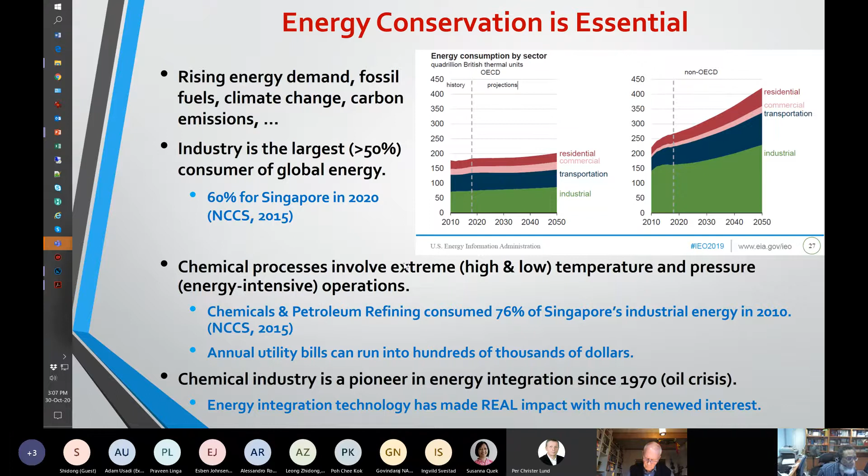So what is my objective? I want to give you an idea of what heat integration means, what heat exchange network synthesis means. I'll give you an introduction to two popular methods used for heat integration problems: pinch analysis, the household word in heat integration, and mathematical programming, the newcomer with a lot of potential. I'll also describe a little bit of work. I promise there's no more than one intimidating slide in my presentation with any mathematical notation.

We have done some work to advance the frontiers, and there are certain novel areas, extensions, for example interplant heat exchange and work exchange, which are important advances in this field.

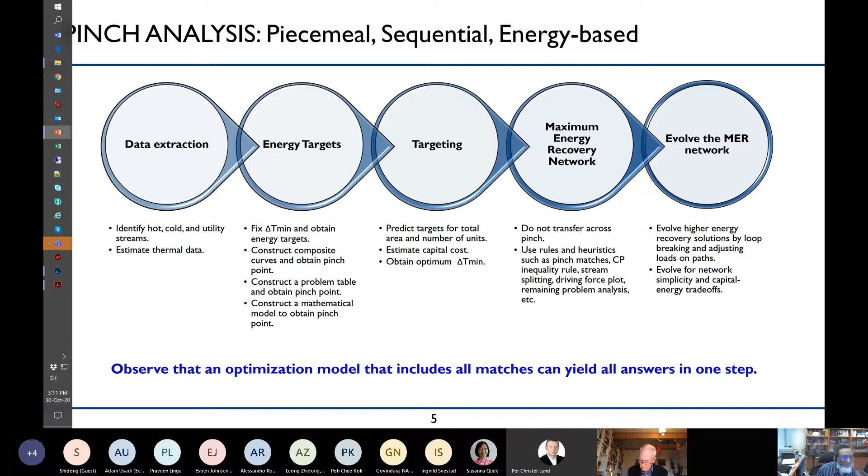I think pretty soon after this started, people realized that if they could express the entire problem as one optimization problem and use an optimization method, they could get all the answers in one shot. That led to the idea of mathematical programming, an integrated method of looking at all the questions and giving all the answers in one shot. One difference between the two methods is that mathematical programming has been more cost based, though it can be used energy based as well, but it was primarily designed for cost based objectives.

And what you do is something called a superstructure, which is you try to include all possible combinations of heat exchanges into a graphic, into a process structure, which you then solve as an optimization problem. So what happens is that things that are not so good get dropped out of your superstructure, and then what you get is a net structure, which is the best structure for your heat integration.

So as I said, superstructure is the key. It defines all the admissible network configurations. If you miss out on a degree of freedom, then you miss out on some particular possible configurations, and then you get inferior solutions.

I think I have lost my stopwatch. Okay, stopwatch is working. All right, fine.

So there are two classical workhorses for superstructure which were developed back in the 80s. But there are some limitations of these superstructures. They miss out on some configurations, and also a key aspect is that they are not readily extendable to address the retrofit problems. And I think you can realize that most plants exist, and lots of them have heat integration opportunities, so the retrofit problem is a very important problem. So we need something which would be able to address both grassroots as well as retrofit problems seamlessly.

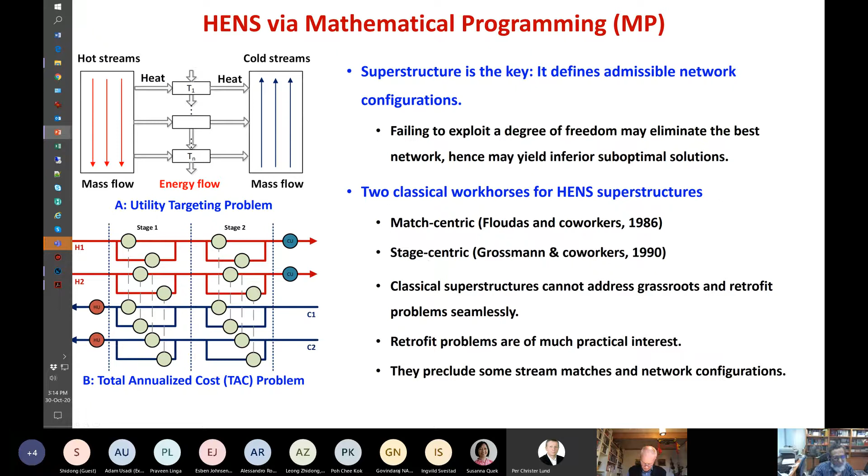I think that was one of the motivations which led us to come up with a novel superstructure, which is basically an exchanger-centric superstructure. The two superstructures that I mentioned, one was match-centric, meaning you try to see what are the possible exchanges, matches between streams. The other is called stage-centric, where it divides the evolution of temperature for every stream into segments or stages, and then tries to look at the possible combinations.

So what we did was, instead of looking at it as a stage or as a match, we look at it as a pool of exchangers. We're saying that a heat exchanger network is really basically a bunch of exchangers, and I have to assign streams to that. So instead of looking at a match or a stage, we look at the exchanger and see what stream should I assign. Obviously I should assign one hot stream and one cold stream, but in a superstructure I say I'm going to assign all the streams and let the optimizer decide which stream is the best combination to assign.

So basically what we come up with is a nonlinear model which selects the exchangers and also assigns the streams to minimize the total cost of the network. So it's a very flexible superstructure. It takes care of the limitations of all the other previous superstructures, and it gives you a solution.

So clearly it's not an easy problem to solve, so we developed an algorithm to solve the problem also, and we showed this on 3 literature case studies. You don't need to go into all the details, but suffice to say that we've been able to get better solutions on all 3 case studies, especially on the first one, which involved a lot of utility usage. We were able to save around 66% of the TAC, the total annualized cost. And we also found a solution which is better than the so-called global solution reported in the literature.

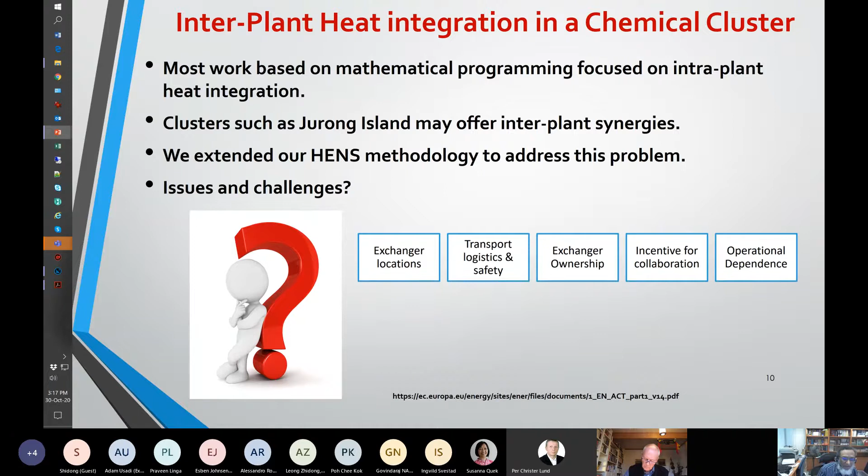How do you ensure operational dependence? Because your operation is now tied with somebody else's operation. Something goes wrong, you get affected as well. So all of these are very pertinent questions.

How do you share expenses? What about the pressure losses in the pipeline? What about heat gains and losses? What about if you want to use a heat exchanger fluid that circulates through the plants? What about the cost of piping, etc.? So there are a number of challenges that are different from the classical heat integration problem that people have addressed.

So we looked at developing formulations and procedures for, if you were to locate all your exchangers at a central facility, and then send streams back and forth to make them heat exchange there. This is something that could be managed by a 3PL or similar.

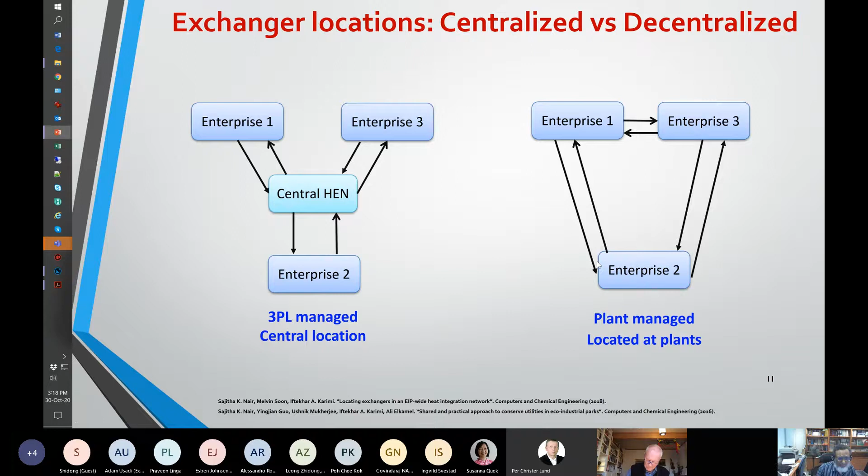Or it could be another possibility where you have enterprises, and you locate stream exchangers at those enterprises, and then send streams from one end. So this is a more flexible way of looking at constructing the network.

Then we also looked at the net present value of all of this. And we thought that maybe the incentive for each participant to take part in this would be to ensure that the rate of return is the same for each stakeholder, proportional to the savings they get, so they also make an investment. So we use NPV as the objective function, accounting for utility expenditures, piping, maintenance, etc., and capex expenses, and then we come up with a...

What happened? Recording, something went wrong. Your presentation ended, someone else has started sharing. Oops, no, I don't think... Well, we don't see that. Oh, just you don't see it? Is it? No, so please start sharing again. Okay, start sharing again. All right, sorry. Start sharing again.

Okay, so basically we did a case study. It's a simple case study, right? Obviously, but the methodology is general, one could look at a very real case study as well, which we are trying to identify. So if you have 3 plants and several streams at each plant, we found out that you can compare distributed versus centralized HEN.

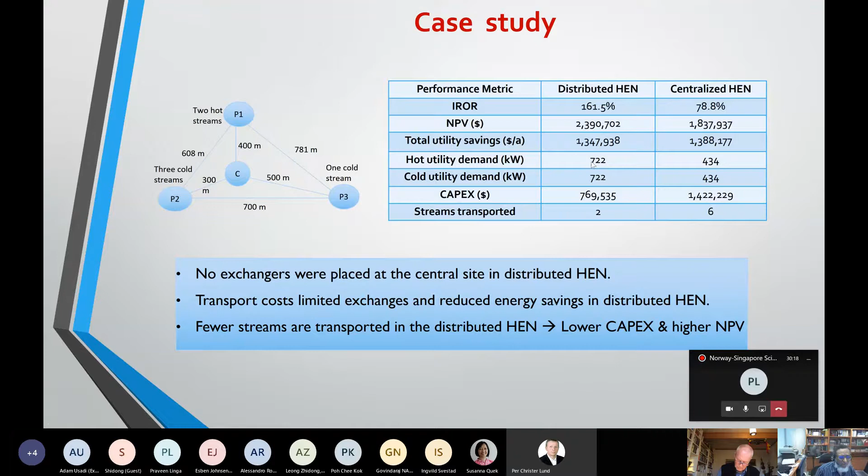So what happened was that the utility savings you get in the distributed system is less than the centralized system, but the cost of transport, etc., outweighs the cost of utilities. So the distributed heat exchanger network system comes out to be better from an overall cost perspective. That methodology can be used in practice as well.

So the second extension I talked about is the extension of heat exchange to work exchange. We all know, right, work costs more than heat. Heating is cheaper than pressurizing. So, electricity... how can we address this?

This is an idea that was explored maybe 10-15 years ago at University of Michigan, where they tried to say, okay, if I have a high pressure stream and I want to depressurize it, I can run a turbine, just like you use high pressure steam to run a turbine and get energy to run a compressor.

So the same idea, instead of using steam and a compressor, what if I use a high pressure stream and a low pressure stream? I transfer energy from the high pressure stream to the low pressure stream. So there are obvious analogies between heat exchange and work exchange. In heat exchange you deal with temperature changes, in work exchange you deal with pressure changes. And you can also draw corresponding analogies between streams and utilities, etc.

So the idea is, one other way of transferring work is having a common shaft. This is used in the industry, in the LNG industry for example. This is called a turbo expander, turbo compressor, and you can transfer the energy from the turbine to the compressor.

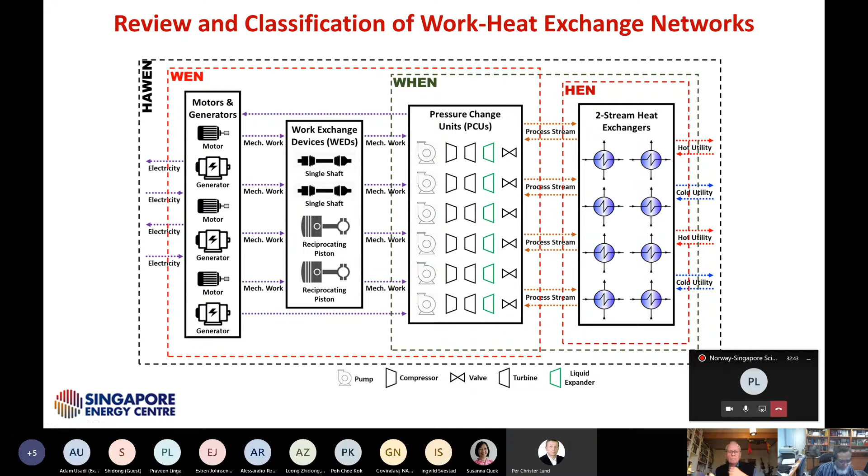Then a few years later, we looked at the use of a single shaft to transfer work. So there we are talking about actual work exchange in a literal sense. And if you put all of that together, what you get is a heat and work exchange network. This classification provides us a good framework within which we can develop our solutions.

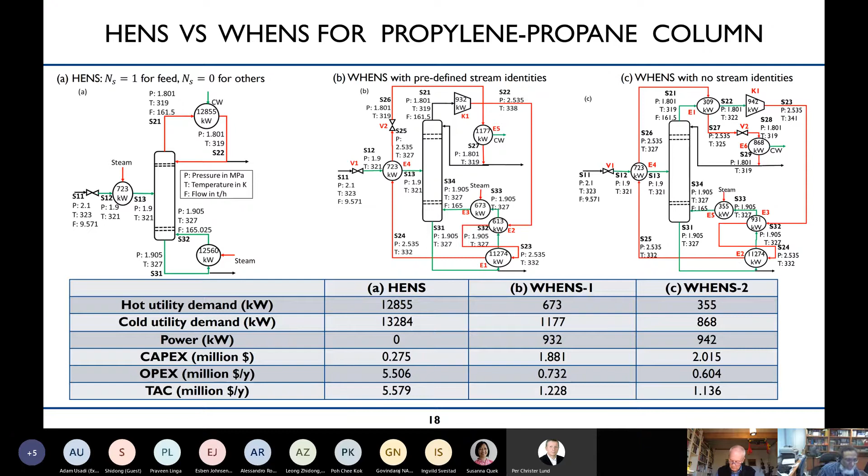So this is again intra-process, but we can extend this to inter-plant as well. All right, okay, so to conclude.

I think work heat integration is now a growing field. A lot of people are interested, and Prof. Gundersen has published a number of review papers on this. We believe that this can offer really very good novel solutions, because I wanted to always have a procedure which will derive the refrigeration cycle or the best cooling cycle, and I can do that automatically using the methodology we have developed.

Okay, so thank you very much for your attention.

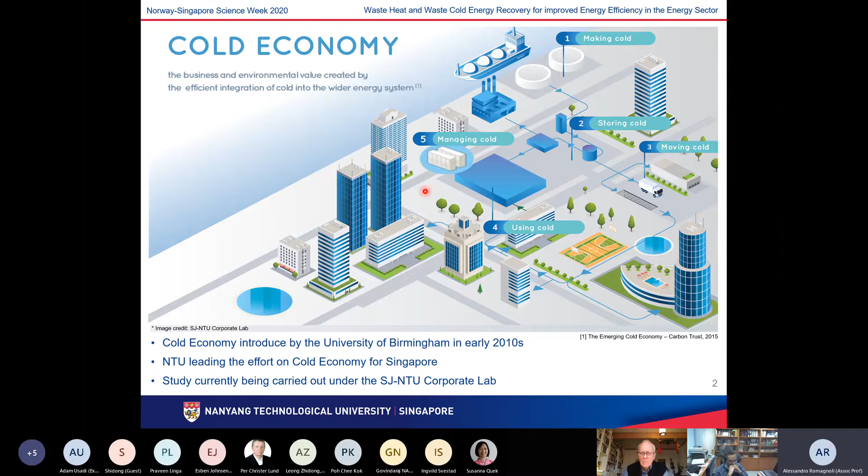So why a cold economy study for Singapore? The cooling degree is expected to increase by 12% by 2040, and there are industries growing in scale that require a lot of power and cooling, for instance data centers. Singapore isn't a mega city by definition, but the population is meant to grow with higher cooling demand. Also, Singapore being a developed economy might represent an example for neighboring countries or cities that eventually develop at a similar stage over the next few years.

One aspect everybody knows about is the availability of LNG, and therefore the opportunity to recover some of this LNG cold energy coming from the regasification of liquefied natural gas.

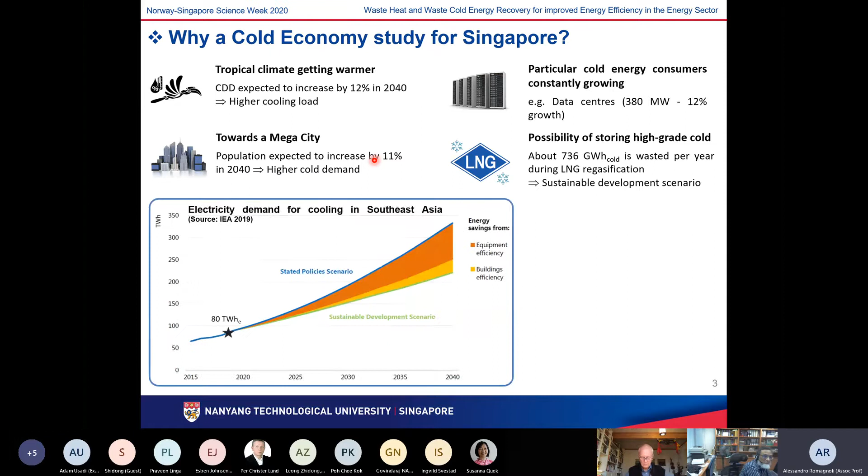If we look at the demand for cooling in Southeast Asia, this is basically for space cooling. You can see this trend as reported by the International Energy Agency. This is where we are now.

In a similar fashion, we are trying to estimate the cooling and refrigeration demand for Singapore to create a baseline, develop forecasts, and eventually study scenarios on how best we can meet this demand. The reason we are doing that is because we couldn't find any publicly available resource that breaks down the cooling and refrigeration demand for Singapore.

So we started with data collection across main sectors: households, industry, commerce and services, and transport, and for some of these we also look at subsectors. For each one we try to estimate the cooling and refrigeration demand. The approach we follow is top-down, and we had to go through a lot of documented resources from official records and published studies, validating the information and calculations we came across.

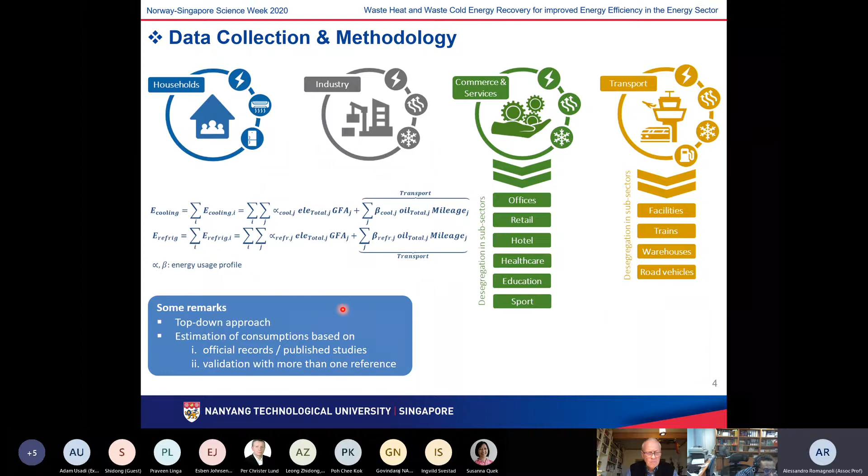And this is basically what we could find out. This is the first time we are presenting this data, so the numbers are evolving, and we are more than open and welcome anyone who might want to collaborate with us on this exercise.

Over the past 10 years there's been a constant increase in cooling and refrigeration demand, about 30% increase, and roughly 25% of electricity consumption in Singapore goes to cooling and refrigeration. This accounts for roughly 7% of the total electricity demand in Southeast Asia for cooling. This number about fuel is mainly related to road transport, trying to estimate how much of this fuel goes into cooling of vehicles.

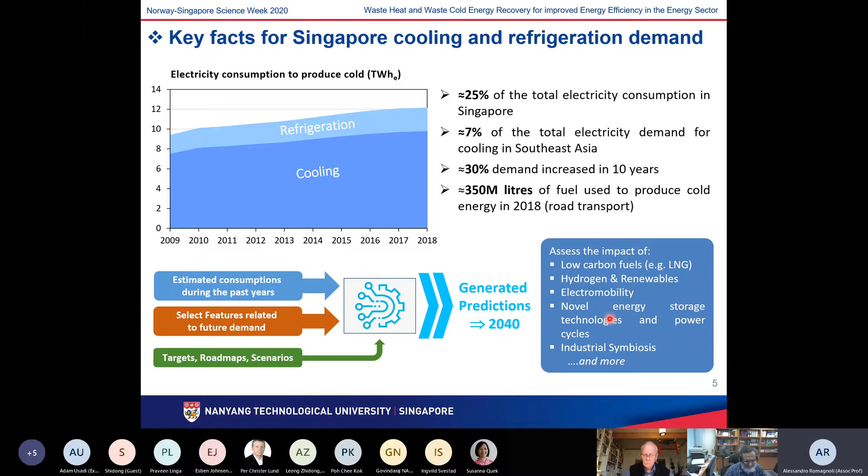So now we've done the estimate. As I said earlier, we want to project across all the different subsectors and eventually study how best we can meet this cooling and refrigeration demand, looking at opportunities or scenarios offered by low carbon fuels, renewables. Now hydrogen is also in the picture. Electromobility might be another driver, and also novel technology for power generation or storage.

So when we look at LNG, more or less 2% of the overall energy content in natural gas comes from the cold energy.

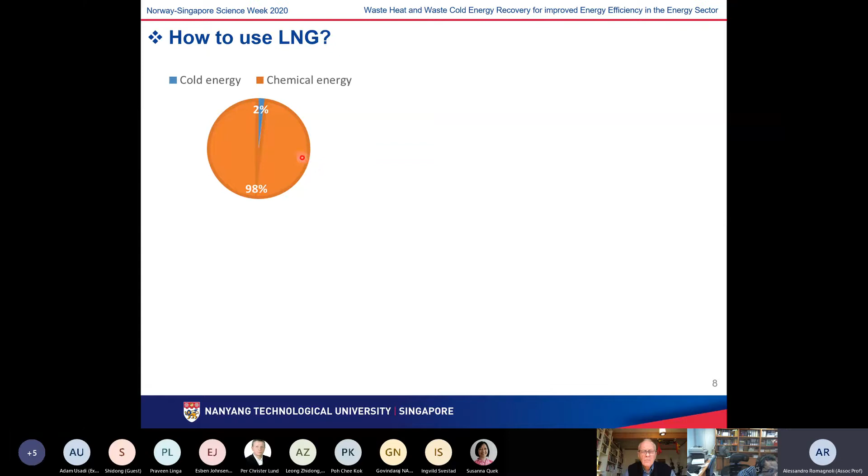The remainder is chemical energy. If you want to position some of the technology that entirely makes use of chemical energy, or for power generation, or that make use of the cold energy for cold generation.

When we look at technologies devoted to producing or making use of cold energy, these are some industries and applications that can leverage on LNG cold. Then there are some in between, like CCGT, which makes use of LNG cold to pre-cool the air at the inlet of gas turbines, and ORC, organic Rankine cycle, which leverages heat coming from a combustion process and can use the cold energy as a heat sink.

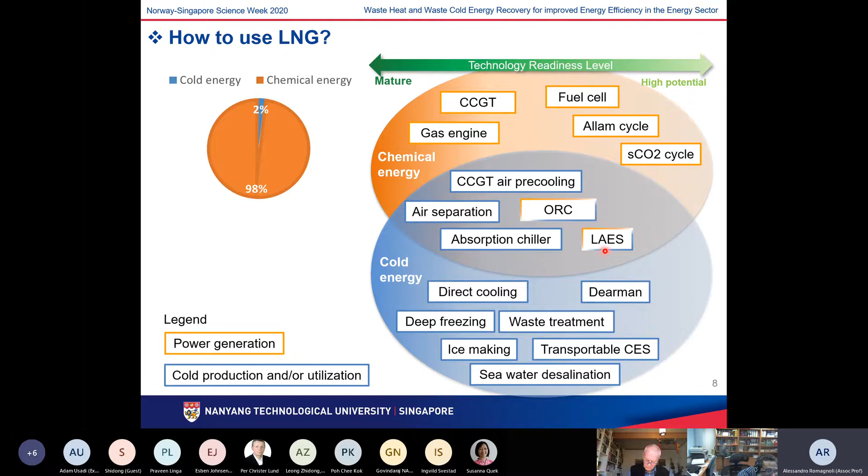The same goes for liquid air energy storage, which is a new form of thermomechanical storage I'll describe later on. So, where we start from is typically the regasification process with gas going into CCGT.

There is some waste heat that can be recovered to generate chilled water, for instance, or electricity through closed power cycles. Some of the LNG cold regasification could be used for air pre-cooling, or as a heat sink, or for direct utilization to the end user.

So we took a baseline looking at CCGT with no waste cold energy recovery and no waste heat recovery. We took that as our baseline, then started looking at different levels of integration for heat and cold energy recovery, such as CCGT plus organic Rankine cycle, or CCGT with inlet air pre-cooling using LNG cold.

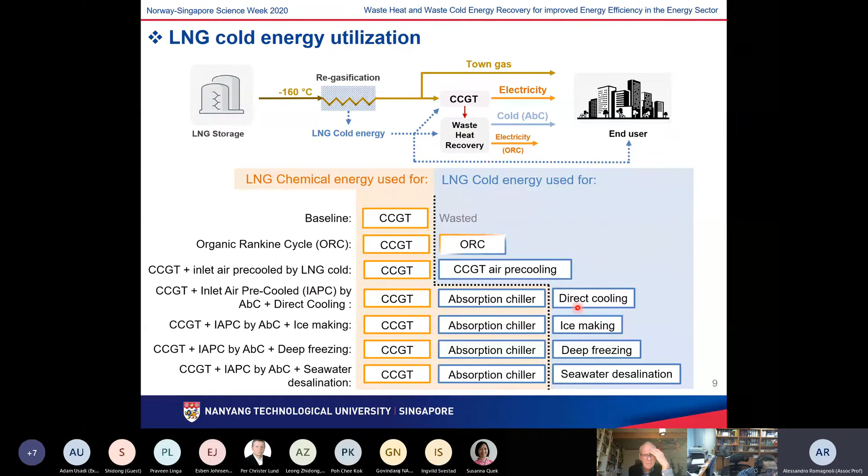Probably the best option would be to couple the CCGT with an absorption chiller, using some of the chilled water from the absorption chiller to pre-cool the inlet air of the gas turbine, and then use the LNG cold for some of these sector applications.

It's still something meaningful, but most of the profit comes from the absorption chiller and chilled water generation. When we go to different applications, the lower we go in temperature, like deep freezing, the better energy savings can be achieved for that process.

We also see that the ice making industry could leverage quite a bit on LNG cold, because ice is actually sold at a very high price. As for CO2 emissions reduction, significant contribution could come from the absorption chiller, which could allow emissions reduction by more than 30%.

Then there are some other scenarios we wanted to assess. For instance, we looked at the Allam cycle, which has been demonstrated in the US by a company called Net Power. This is a supercritical CO2 cycle which starts with an air separation plant.

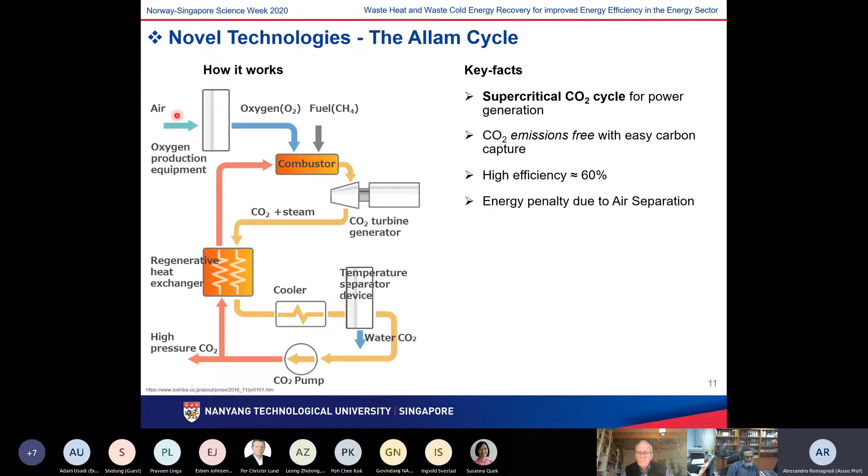It comes with a large energy penalty due to the air separation, because cryogenic air separation takes quite a bit of energy. That is where we could leverage LNG cold to bring down the energy penalty due to air separation, and this could provide an additional 10% in terms of efficiency.

As we separate oxygen from nitrogen, some of this nitrogen, if liquefied, could be used for this new form of storage, which we call liquid air energy storage. So nitrogen as a byproduct could be liquefied and used for liquid air energy storage. So what is this liquid air energy storage?

Liquid air energy storage is a process that liquefies and evaporates liquid air to store and regenerate electricity. So how does it work? Of course you need power input, and basically we take ambient air, clean it, compress it, refrigerate it, and liquefy it at minus 196 degrees Celsius in an unpressurized vessel.

This liquefaction process corresponds with the charging phase of this energy storage concept. Then, when we need to discharge it, we can pump this liquid air at high pressure, regasify the air, and expand the gaseous air in a power turbine. The exhaust will be gaseous air, and power will be generated.

During the compression and liquefaction process, there is heat being generated that can be stored and reused during the discharge phase. And during the regasification process of the liquid air, there is cold which is released, that can be stored and reused internally for the liquefaction process.

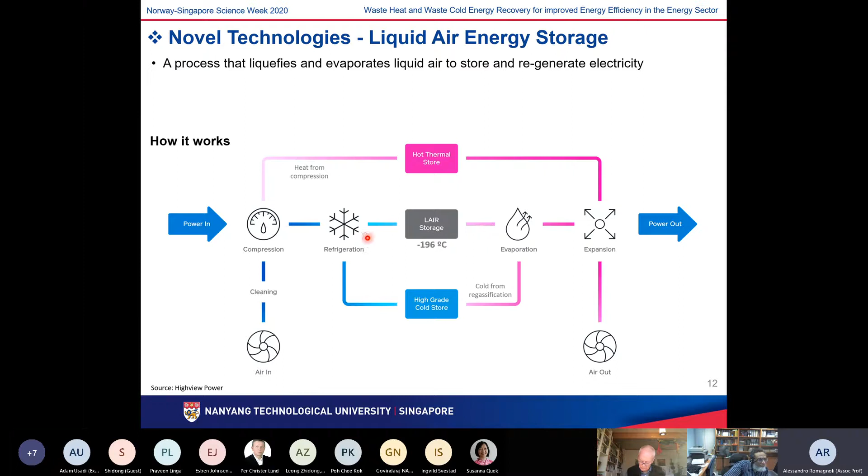So in this form, with this layout, the claimed round trip efficiency is around 50%. Again, numbers vary. But if you could leverage LNG cold as well as an external waste heat stream, then potentially you could achieve a round trip efficiency of more than 80%.

This concept is of interest because we can also consider a cogeneration operation for this facility, in which we generate power as well as cooling during the discharge phase of the liquid air during the regasification process. Another option, if you have natural gas, is using high temperature fuel cells, which have very high temperature heat streams that could be used to drive a supercritical CO2 cycle.

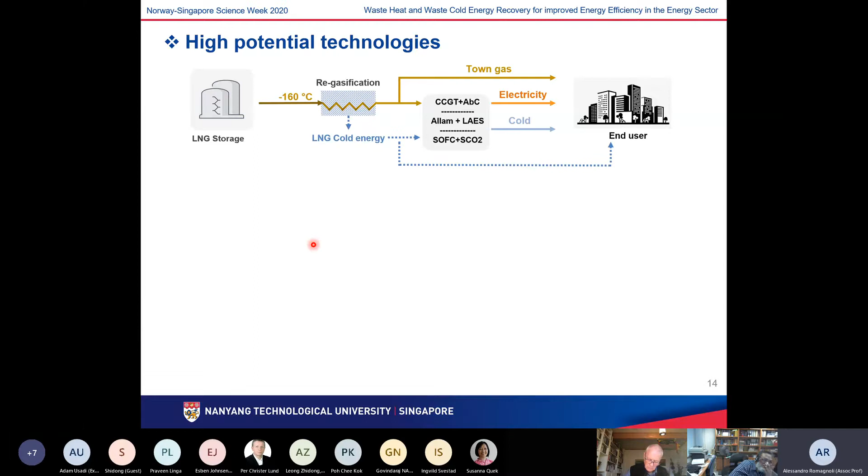So these are some of the integrations that could be considered that we put into our study, to see what the impact could be in terms of improvement in efficiency, as well as contribution in terms of CO2 emissions reduction. So here are some of the different integrations that we consider.

Baseline is the CCGT with no waste heat or waste cold being recovered. Then we took this configuration with the CCGT plus absorption chiller, with air pre-cooling before the CCGT and utilization of the cold for direct cooling. We could have chosen some other application here as well.

Then we look at the integration of an Allam cycle plus liquid air energy storage, because as I said earlier, we can make use of the cold energy from regasification to assist the separation process of nitrogen and oxygen, as well as support the liquefaction of nitrogen, which could work as a substitute for air in the liquid air energy storage concept, serving as a storage system. And then a solid oxide fuel cell combined with supercritical CO2 cycle, using LNG cold for instance for direct cooling.

So again, if you look at the overall profit and the CO2 emissions reduction, you can see that as we go for different levels of integration, moving from this side to this side, the CO2 emissions reduction improves as a consequence of the higher efficiency that can be achieved. But of course, one thing to consider is that as we move in this direction, the TRL also decreases.

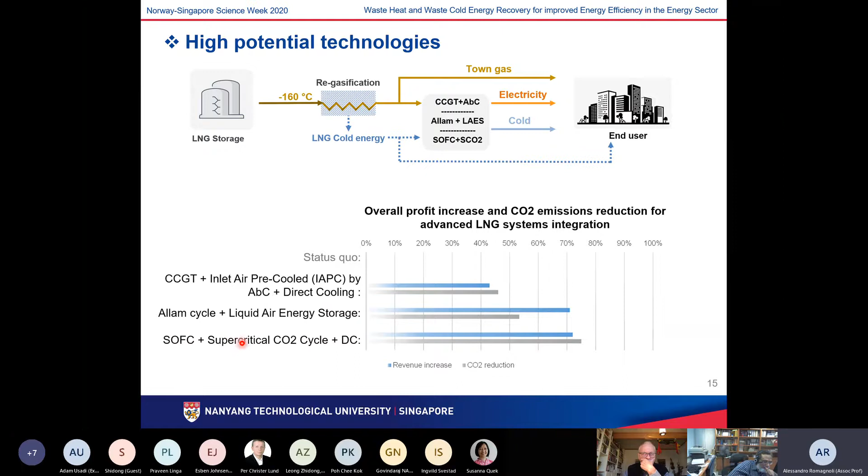So liquid air has actually been demonstrated. This is fairly high TRL, but still not widely or large scale deployed. And for some of these, it's still just in the papers that I can find in some of these studies.

So now, for what concerns the R&D activities here, I put an NTU example, but these are some ideas on R&D activities that could be envisaged in the cold energy space. We see that there is a bit of a lack of research activity when it comes to thermal energy storage at the sub-zero temperature range.

The number of materials available and papers and publications is improving due to the fact of having more and more LNG in the picture, and also maybe cryogenic hydrogen being considered as a form of storage for hydrogen. But we see that there is not as much activity as on the hot part.

Also what we see is that we still need quite a bit of work when it comes to system design, optimization and integration. So if you want to combine some material for thermal storage together with heat exchangers, how to couple this together and optimize the design to meet a certain demand - it really depends on what is the KPI for this. It is still not a fixed methodology, and I think there is some work that could be done in this space.

So the way we started it, we began to map which are the materials, the studies on experimental and numerical work, and some of the applications, trying to also capture some of the TRL for some of the works being done in each of these areas as we move lower in temperature.

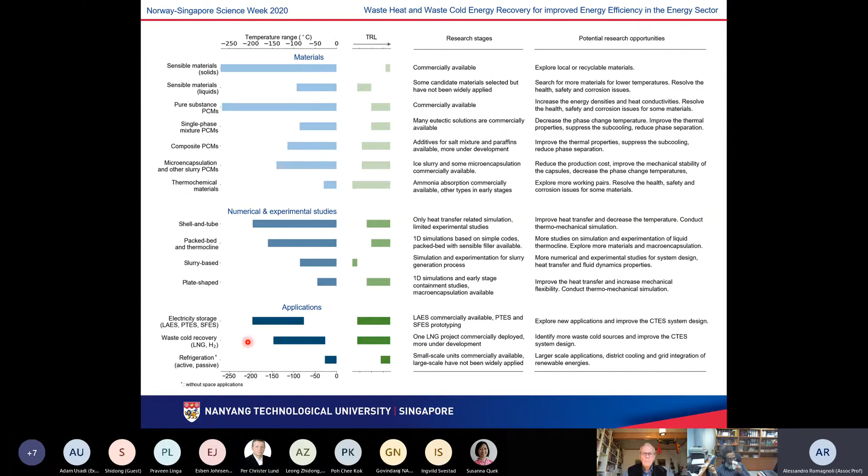Not to go through each one of these, but basically there is still quite a bit of gaps, as you can see, in this temperature range, and also the TRL seems to be pretty wide. But as I said earlier, there is not much work being done in each space, so there is an opportunity there to improve.

And then for what it concerns the studies for system design and optimization, we currently have set up this facility, which is basically, we call it a...

So did we lose Alessandro now? Yeah, cannot hear it. Right. Okay, so maybe he's coming back, but he was coming back.

And while we are waiting for Alessandro to come back online, maybe - because we're moving quickly into the Q&A session for this session - there is a question to you, Professor Karimi, from Esben Johnsen.

He says: in your presentation you have calculated in your net present value calculation, you identified, you simulated or identified the distance where net present value is no longer positive. So his question is, what about the distance? Is that a major driver?

Yeah, so just to answer that question briefly: yes, definitely distance is a very major factor, because often the piping cost and the cost of transport, of pumping, etc., outweighs your utility costs. So it depends - of course the answer is not straightforward, right? There is no generic answer for any system, but the answer to your question will depend on specific details of the system, because what you're talking about is distances of inter-node distances, and there are many of them. So I cannot really take one distance and say, okay, if I elongate it further, what will happen? But the short, brief answer is yes, it's a very major driver, and it can negate your solution. So beyond a certain distance, you may not be able to achieve what you want to do, because the capital costs associated with the piping could outweigh your operating costs. I hope that answers the question.

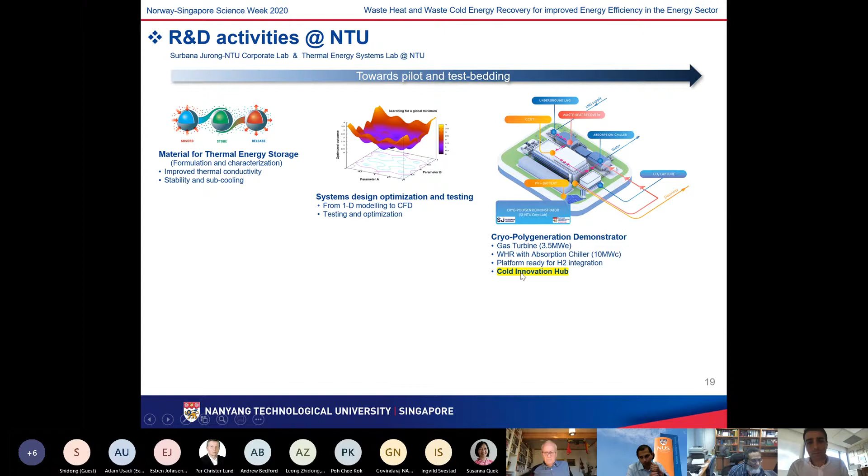And also we are going to test ways to store LNG underground, and we are going to set up again a sort of living platform for what we call a cold innovation hub, where companies or researchers that may want to test and demonstrate technology leveraging LNG cold can come and use it. So this is open across the research community and also to industry.

So for what it concerns some of the work that we are doing, we are working on cold thermal energy storage system design, also looking at ways to store cryogenic energy, moving away from membrane technologies.

So basically, in conclusion, these are very qualitative findings, but what I can say is that there is still a bit of a question mark, and we need to achieve a bit more understanding of some of the demand for cooling and refrigeration in Singapore. Knowing what happens in Singapore is not just useful for Singapore, because as I said earlier, it might also serve as a pilot for neighboring countries.

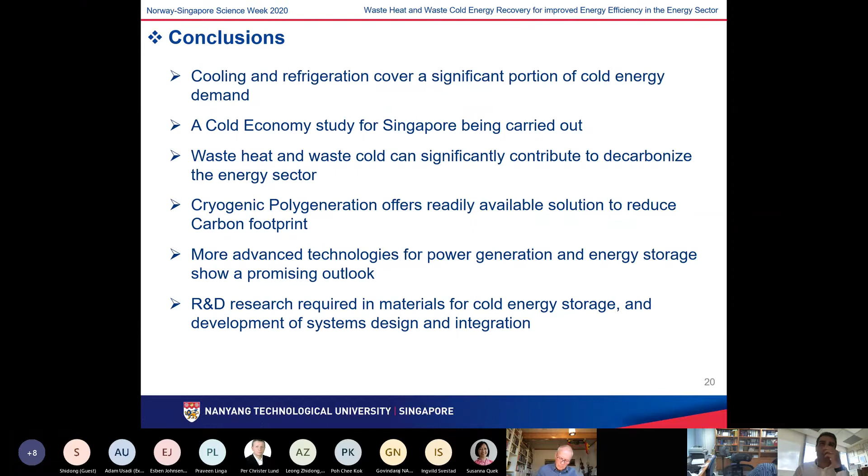When it comes to waste heat and waste cold, this can offer quite a bit of an opportunity to quickly reduce CO2 emissions. Some of these options are readily available when we look at the polygeneration system that basically would help, but of course that would mean we have to distribute energy generation island-wide. We also look at different power cycles and thermal energy storage systems that seem promising. In terms of R&D, we think there is still some work to be done in the cold and cryogenic energy space, in terms of materials and energy systems design and integration.

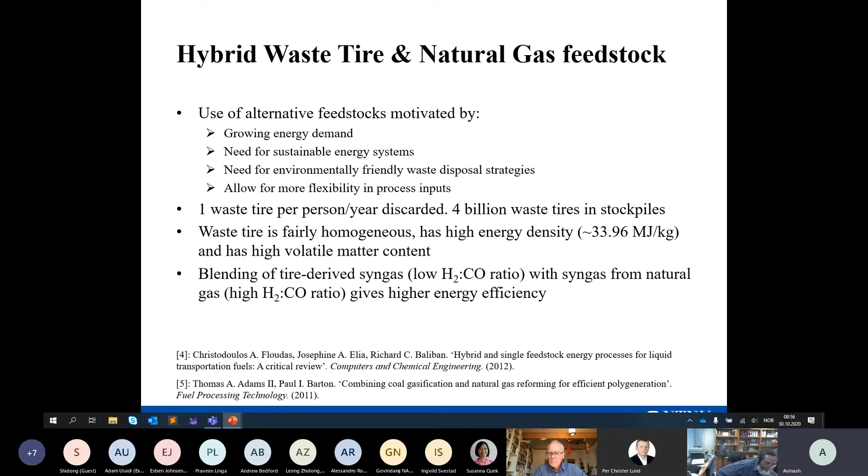Lastly, if we were to combine waste tire and natural gas, the syngas ratios work out. As mentioned, waste tire gives us hydrogen-lean syngas, natural gas gives us hydrogen-rich syngas, and we can blend to get the correct ratio for methanol. So we eliminate the expensive water gas shift and syngas upgrading/downgrading steps.

This slide presents a superstructure of the polygeneration system we studied. We have waste tire, which is mixed with water and oxygen from an ASU, goes through a gasifier and is cleaned up, and then we get syngas. We also implement a water gas shift just to test things. Then with the natural gas, we use the autothermal reforming approach, and we get hydrogen-rich syngas, which you can blend.

We consider three products: synthetic natural gas, methanol, and further on DME and methanol-to-olefins, or direct production of electricity through a gas turbine. We go further to produce liquefied synthetic natural gas.

This optimal flexible design problem can be formulated as what's termed a scenario-based two-stage stochastic non-convex MINLP. Here Y, as mentioned previously, are the here-and-now first stage variables for equipment capacity. The objective is a function of these first stage variables and the second stage operational decision variables, where H indexes the scenario of uncertainty that is realized. We also have constraints on the first and second stage variables.

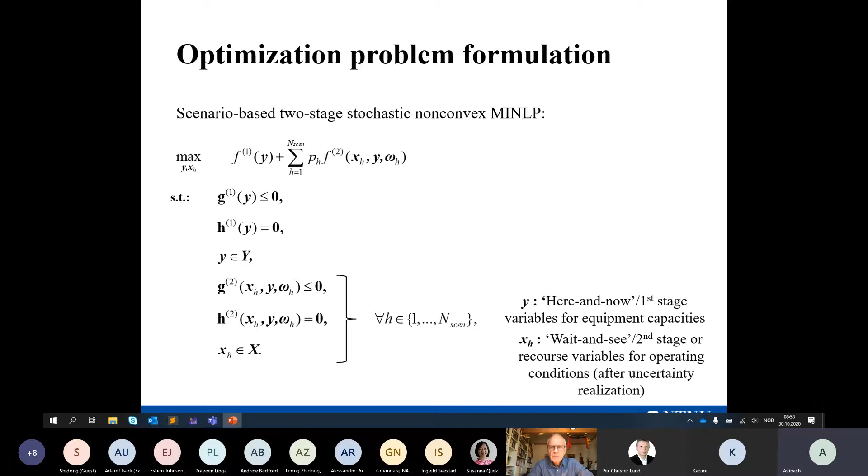So more precisely, for the flexible poly generation system, the objective is to maximize the expected net present value. We have the capital costs, which are a function of the first equipment capacities, Y, and we have the annual operating profits for each scenario, which are a function of the operating decision variables X, H.

The first stage constraints are the capital cost model. Second stage constraints are the mass and energy balance, operating cost, annual net profit model, and scale constraints. We also have complicating linking constraints which make things more difficult between the first stage and second stage variables, so throughput should be less than equipment capacity.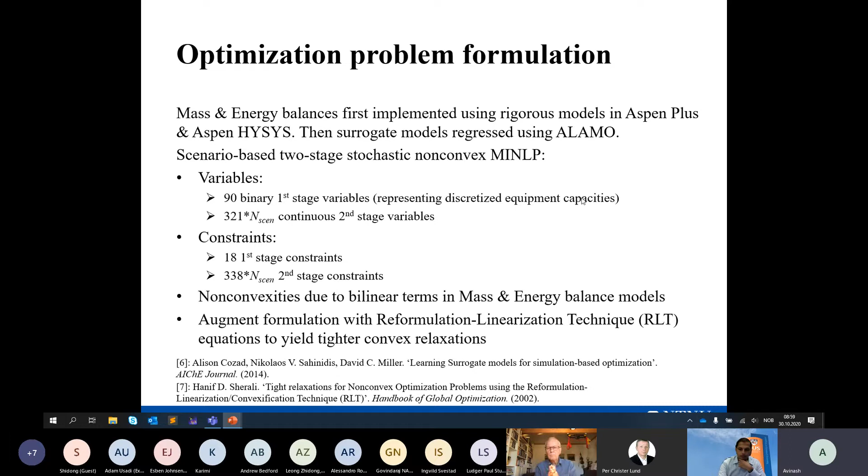This slide presents implementation details, which I won't spend much time on. We basically implement mass and energy balances in Aspen, generate surrogate models with Alamo, and formulate the non-convex MINLP.

This slide presents the uncertain parameters, which are the product prices of natural gas, electricity, methanol, DME, ethylene, and so on. We assumed the prices belong to a normal distribution, and we got mean and standard deviation values from historical prices, as presented in this table.

We formulate the optimization problem using a recently developed software called Gossip, developed in 2018 at Paul Barton's lab at MIT. I won't present details here, but I'll say Gossip provides a versatile C++ framework for modeling these two-stage stochastic programs, and we have an efficient decomposition algorithm to solve for a large number of scenarios, making solving such problems easy and efficient.

Next we present the results of the optimal flexible design problem. We had two case studies. Case study 1 had two scenarios of each of the 5 uncertain parameters, so 32 scenarios in total. Case study 2 had 3 scenarios of electricity and natural gas and 2 for the rest, so 72 scenarios in total. We also compared with the deterministic case where all uncertain parameters take on their mean value, termed the mean value problem, which is just one scenario.

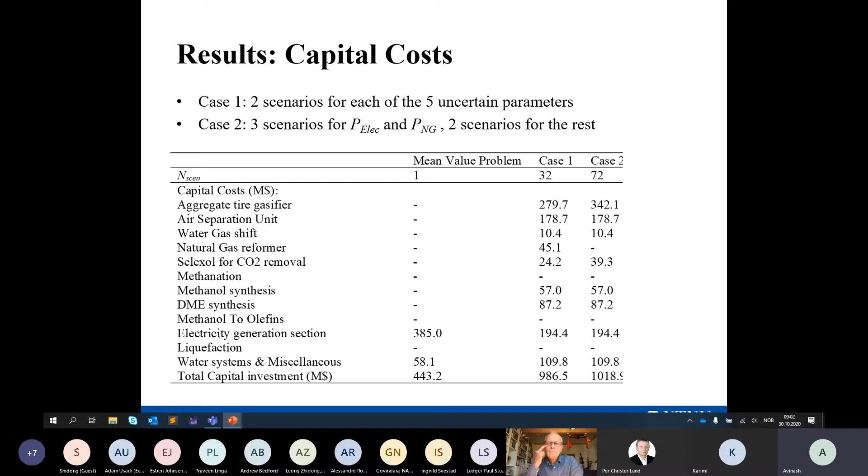Moving on to the operational modes and economic performance: for the mean value problem, we found a case in which natural gas is converted to electricity, fairly basic. But this is only true if all prices remain exactly at the mean value, which is not feasible.

If we take uncertainty into account, we see that the operating mode shifts to favor multiple other products at their price peak. For instance, if DME and electricity experience higher prices, we shift operating conditions to produce that, and we produce methanol when methanol prices are high, electricity when electricity prices are high, accounting for day-night variation and so on.

The main result of this work is that we get a substantial increase in NPV if we take this uncertainty and variation in prices into account and build a flexible design. The expected increase in NPV is in the range of 35 to 55%, so $884 million versus $560 million. This is for a 900 megawatt plant.

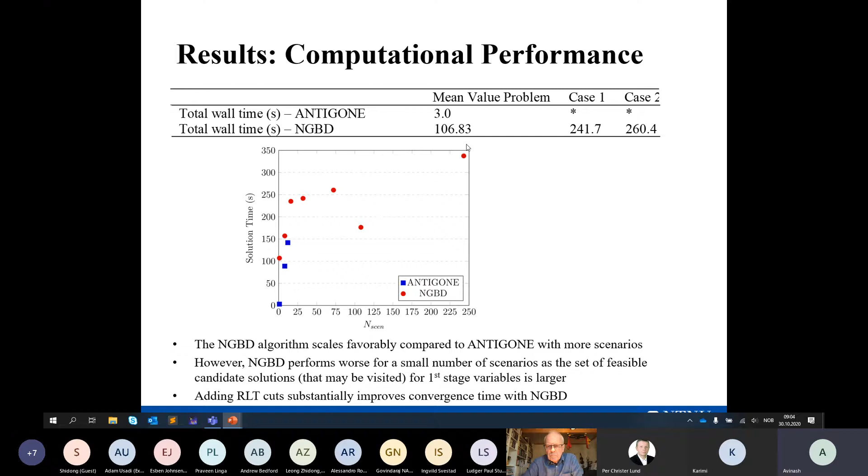Yet using a decomposition algorithm gives us favorable scaling up to many scenarios.

In conclusion, we see that implementing a poly generation system gives improved energy efficiency, partly because, as I mentioned, for these two reasons: we get heat integration of the ATR, which is the autothermal reformer and is endothermic, and the tire gasifier, which is exothermic, and blending of hydrogen-rich and hydrogen-lean syngas streams.

But the major result of this work is that implementing a flexible design gives a substantial increase in expected net present value. We also show that using the decomposition algorithms that were built allows us to take uncertainty into consideration with more scenarios. So thanks a lot.

I'm sorry, I was muting. Thank you very much, Avinash. We will wait with the questions until the second speaker, Professor Chua, Ernest Chua from NUS, is giving his presentation, and then we take the questions for both of you after that.

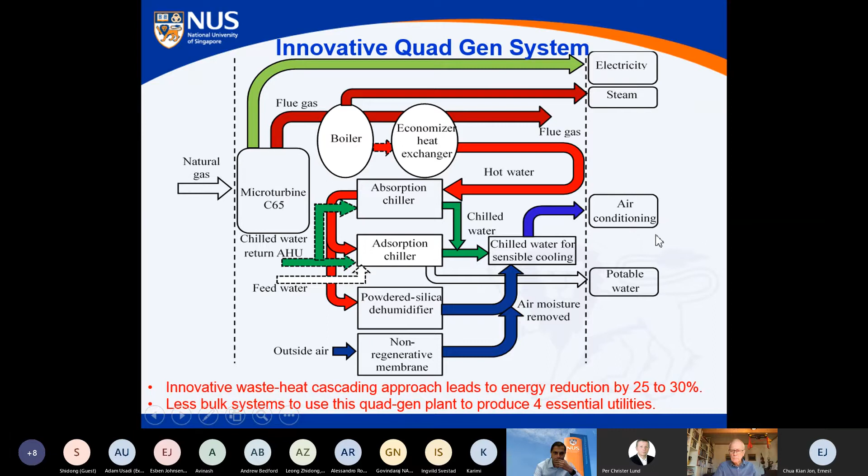And you can also produce potable drinking water. So this is a schematic, and this is the real plant that we have developed in the lab. You can see the micro turbine—it's about 65 kilowatts per unit in the lab. We have 2 units of this, giving us about 130 kilowatts of electricity.

And the boiler is here, producing hot water or steam. The reject heat from the boiler will go through the 2-stage absorption chiller, and the reject heat will also go to the AD chiller. This is a 4-bed AD chiller where we can produce additional chilled water, and at the same time clean up brackish water, desalinating it to produce potable drinking water.

The additional heat coming out from the AD chiller is about 40 to 45 or 50 degrees. We can use it to regenerate the super absorbent, the desiccant, to dry the air. Alternatively, we also have a second stage membrane dehumidifier to further dry the air, for special applications in certain industries that need the air to be particularly dry. Normally in air conditioning, we need the air to be about 12 to 13 grams of moisture.

For certain industries like wafer fab, they need the air to be about 4 to 5 grams. So using this combination of the absorption chiller and the membrane, we can get about 4 to 5 grams of moisture to produce dry air. Additionally, recently we have coupled to this system a dew point evaporator cooler. This is one of our key inventions where we can produce air conditioning, where this evaporator cooler does the sensible cooling. So you get cold and dry air simultaneously, combining with this entire system.

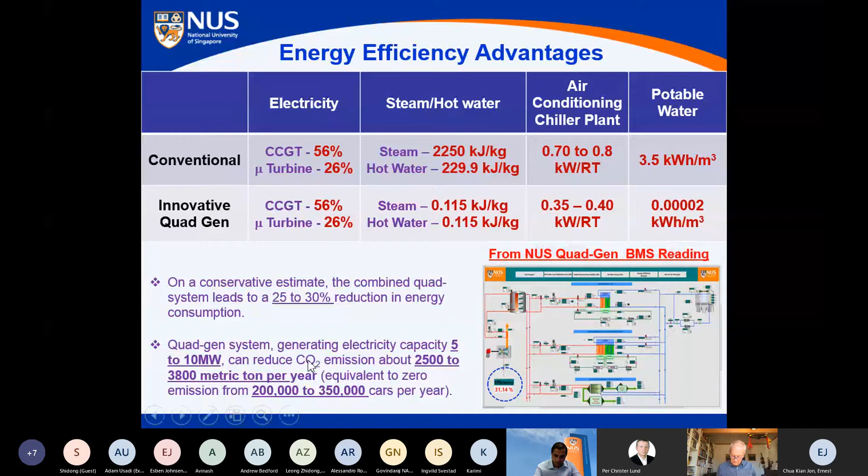So if you look at this, the overall utility production using this innovative quad gen system versus the conventional way, meaning each of these utilities is produced individually, you are looking at about 25 to 30% energy reduction guaranteed. And if you size up the system to about 10 megawatts, we are looking at CO2 reduction about 2,500 to 3,800 metric tons per year. This is equivalent to about 200,000 to 350,000 cars per year. That means removing this number of cars from the road is the equivalent amount of CO2 that you shave using this system versus the conventional system.

So the innovation in this combined plant we have developed is, you can see it's like a Lego system, right? We have innovative systems that are being pieced together to form this entire quad gen system.

So one of the key technologies we developed is the membrane system to remove moisture from the air. This membrane can remove up to 5,000 cmh of air, and with that airflow you are looking at about 2 kg of moisture being removed from the air per hour.

And then we have the super absorbent that we can coat on any metallic solid surface to make a heat exchanger become a latent system as well. Besides removing heat, the exchanger also removes moisture at the same time.

And the beauty of this new material that we discovered is that it only regenerates at about 40 to 45 degrees. If you use silica gel or zeolite commercial material, you are looking at regeneration at about 80 to 120 degrees C. That kind of high temperature regeneration doesn't make sense - you need something with much lower heat to regenerate.

So the two-stage absorption chiller is also designed in-house. We have a two-stage system where we use a new kind of hybrid coolant refrigerant, which is ionic liquid and water. Conventional absorption chillers use lithium bromide and water, which has a lot of problems - it crystallizes in humid climates, and once it crystallizes your absorption chiller has a lot of problems. So this combination of the new kind of coolant refrigerant helps minimize - I should say the chances of crystallization are practically very, very minimal compared to lithium bromide and water.

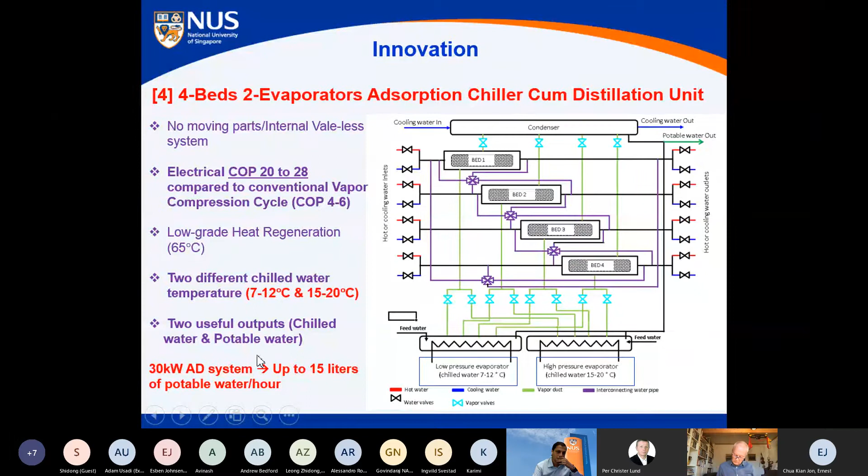This system we designed in the lab is about 30 kilowatt capacity. This is the pictorial version of the system - you can see there are 4 beds, with 2 evaporators producing 2 different chilled water temperatures. And as it produces chilled water, clean water is being produced at the same time.

Three minutes more, please. Yeah.

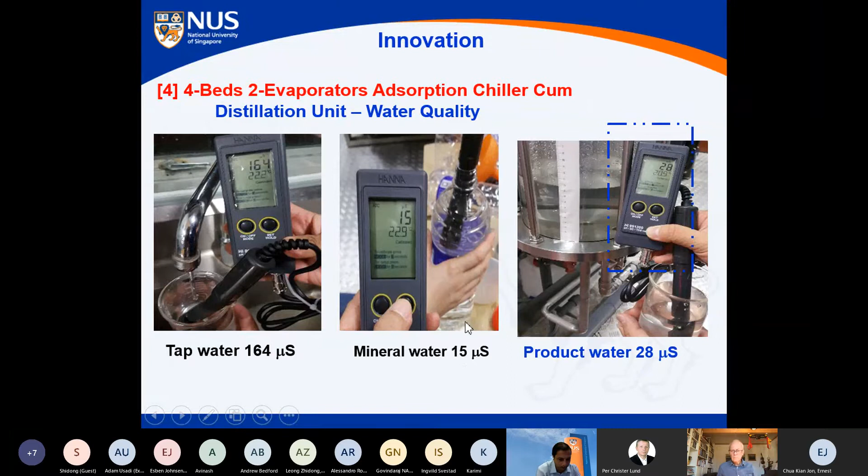And then you ask how good is the clean water. The water is very good. If you look at the product water, it's about 28 microsiemens compared to your mineral water. So I'll not go through this, you have seen it.

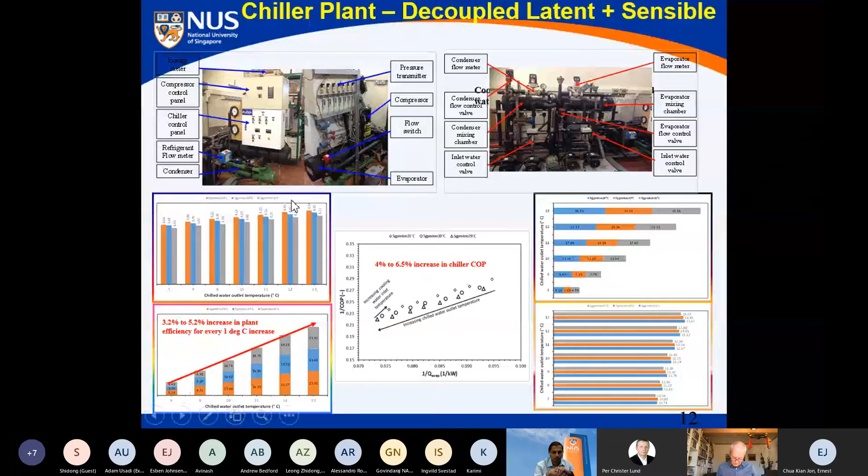We are about 25 to 30% better compared to them. You ask, if you use a membrane or super absorbent to remove moisture, what is the impact on a cooling system? The impact is that your chill water, typically supplied to your AHU from your chiller, normally runs at about 5 to 7 degrees. If you have a system that decouples the sensible and latent loads, your chill water no longer needs to run at 5 to 7—it can run at about 13 to 15. And every degree increase in chill water temperature gives about a 4% increase in efficiency.

These are real data from the lab. One of the big markets here in Singapore is district cooling. We are looking at how district cooling impacts the whole cluster of buildings in terms of saving energy for providing air conditioning. If, for example, all the AHUs have the membrane or super absorbent to remove moisture, then your district cooling plant doesn't have to supply chill water at 5 to 7 degrees—it can be supplied at 13 to 15 degrees.

That means not only big energy efficiency gains from the 4% improvement per degree increase in chill water temperature, but also, since the chill water runs at higher temperature, the pipes buried underground lose less heat. That's a big impact—you save more energy, both from the plant perspective and from reduced heat losses through the piping.

We are looking at Singapore in the future, whether the whole of Singapore can be district cooled. That means the Singapore government could sell you district chill water, instead of you having individual split unit aircon in your house. If the government sells chill water using this concept and runs the whole of Singapore as one big district cooling plant, that will save a lot of energy and reduce carbon emissions significantly.

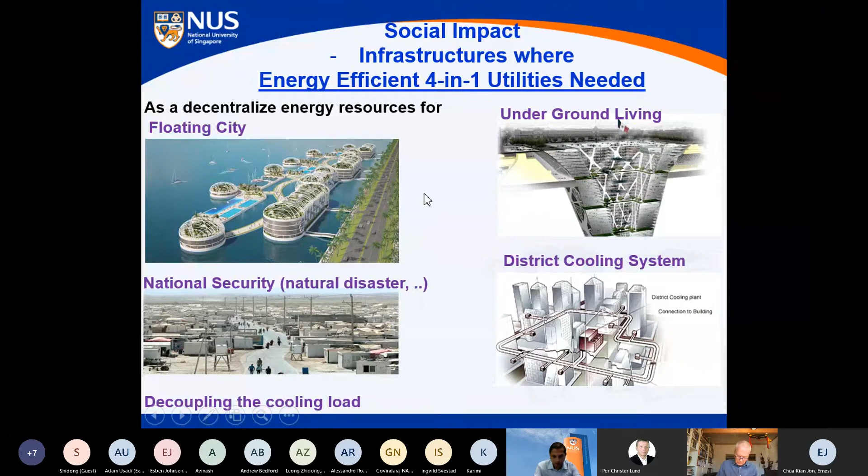So what is the impact of this 4-in-1 utility plant? We can apply it to underground cities, district cooling plants, and also to floating platforms, floating cities and so on. Because all these cities need water, electricity, hot water or steam, and we also need potable drinking water.

Now we have digitized our systems and made them very portable.

We can control the plant we designed using our handphone. If we want to produce more chill water for the day, or more potable drinking water, we can just control it using the handphone anywhere, in any part of the world. We can also use that to diagnose whether any part of the plant has faulty problems.

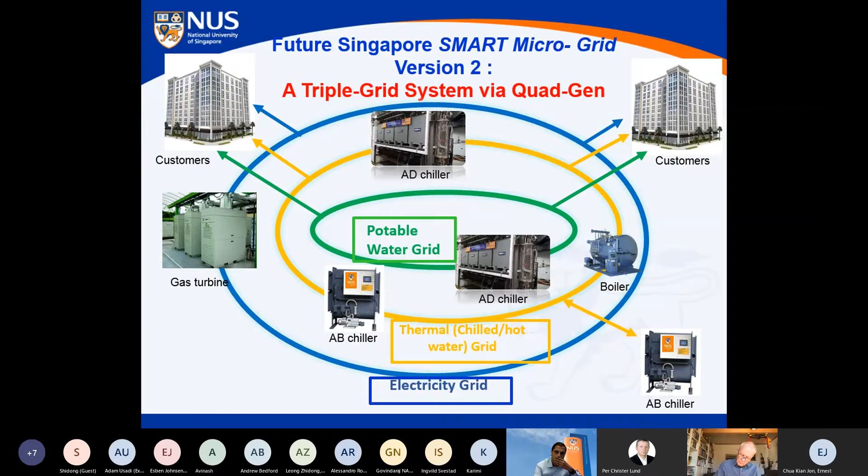We can eradicate those problems. So the combination of this quad-gen system allows us to combine the three grids together—the water grid and the electricity grid—so we can optimize this network, three networks together into one: electricity, potable drinking water, as well as the thermal grid, which is the chill water for providing cooling to your building.

So in conclusion, we have designed this quad-gen system. We have tested it, shown the numbers, and shown the improvement in efficiency. For outputs—chill water, hot water, steam, potable water, and electricity—we have decoupled the sensible and latent cooling for such a plant. That means the chill water can be provided at higher temperature to see better improvement in the kilowatt per ton for the cooling plant.

Novel technology we have produced: the double stage absorption chiller, the 4-bed driven AD chilling system, membrane, super absorbent dehumidifiers. The beauty of this is that this whole plant can be controlled and optimized anywhere in any part of the world, which is very appropriate for smart city applications. You want to control your plant, see how it performs, and control individual utility provision on a day-to-day basis. With that, I'll end my presentation here.

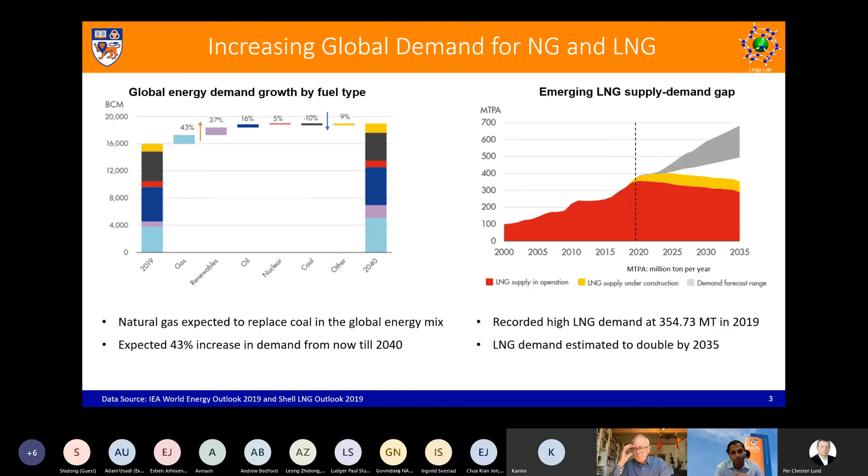This brings me to my next slide, please. This brings us to what is the importance of LNG in the context of Singapore.

So the main transport of natural gas is LNG, which comes in the mode of ships to Singapore. As we speak now, 95% of the electricity in Singapore is generated by natural gas. Of this, as per stats from a few years ago, LNG contributes about 25 to 30% of the overall energy requirements. So this tells you that there is a large volume of LNG coming into the nation in the form of ships.

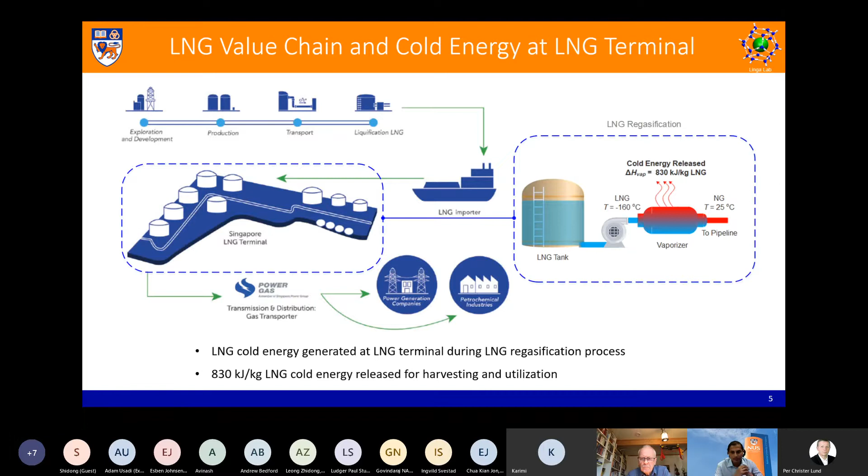If you look at what we could do, Alessandro's slide had many more options up there. I've taken down some of them because if you look at Singapore, there are three important factors when LNG cold economy comes into play. Number one is reliability, very important given SLNG's mandate and requirements. The second is speed, and the third is scale, because per hour we are processing nearly 200 tons of LNG in the terminal. So speed, scale, and reliability are critical.

So I've listed some of the concepts we could use in Singapore for LNG cold energy utilization. But as Alessandro highlighted, there are many things you could do. If you look at the left-hand side, you could actually generate power.

This is where Raj is going to talk about some practically relevant ideas on that. Osaka Gas in Japan has been doing a lot of R&D work with regards to cryogenic power generation for nearly 30 years. It's a very mature technology to use organic Rankine cycles to generate power.

The second option, also touched by Alessandro, is you could use it for cryogenic air separation. Cryogenic air separation requires extremely low temperatures, so you have to look at how efficiently the cold can be transported with speed and scale in mind if you're trying to do cryogenic air separation.

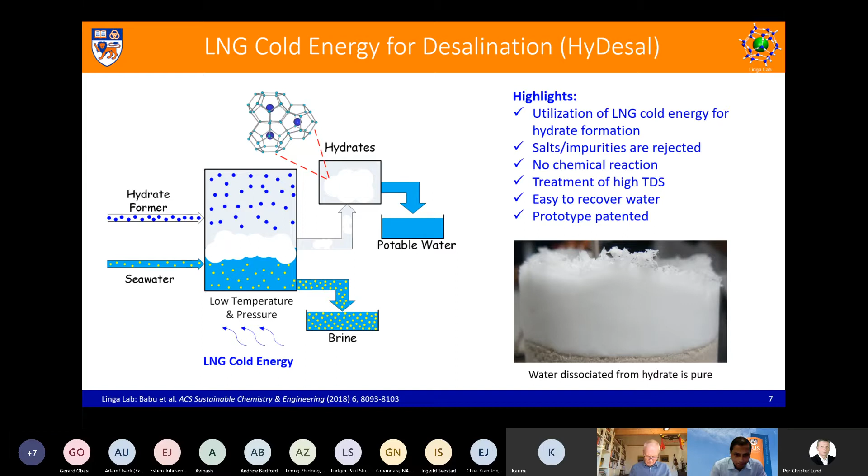So then the second idea that we have recently started, last year we got funded by another IMDA. We got funded by IMDA, supported by the actual money comes from NRF, but the agency that administered is IMDA. I'm not going to talk into the details of it because of the IP involved and sensitivity of the data we have generated.

So if you look at the overall scheme of this, we want to use LNG cold energy. And we want to use hydrate again, another form of hydrates as a medium to store the cold energy. And with that cold energy, we want to run a data center unit. So basically, we want to eliminate the use of chilled water, replace chilled water by using a semiclathrate as a fluid medium.

Now, there are several advantages here. You could actually utilize LNG cold energy from a terminal. Again, here speed and scale comes into play. We have demonstrated that we could achieve about 20% improvement in the overall energy efficiency. And use of hydrate slurry actually reduces the size of the cooling requirements in a data center. That essentially means more space to store data and make more revenue.

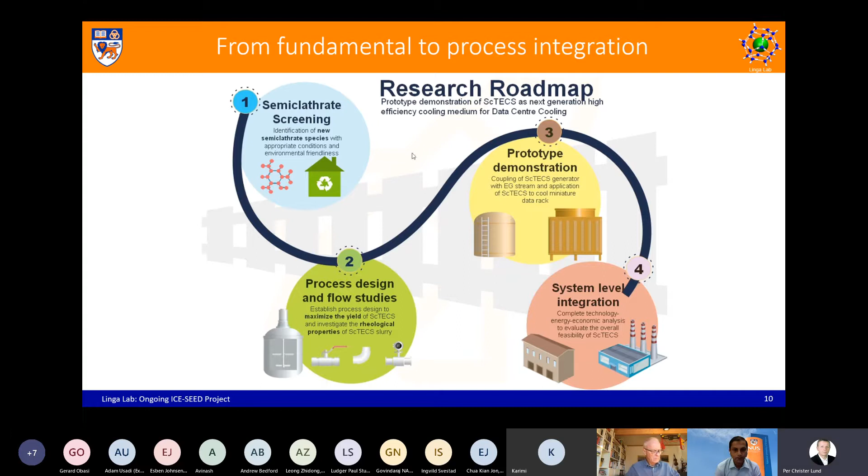Prof. Linga, we're running out of time. Could you please come to your conclusion? I'm closing down in 1 minute, yes. Oh, okay, I mean less than 1 minute.

So if you look at this slide, this is again a high-level slide touching upon something that Prof. Chua, Ernest Chua, touched as well. We want to look at using this medium as a replacement for the need for ice storage systems in an overall centralized district cooling system. We can carry more cold - the earlier slide actually highlighted the numbers. This is also something that we intend to work very closely with industry partners in the next few years.

So just to conclude, this century belongs to natural gas. I'm not sure how much hydrogen is going to come into play, but I am also an optimistic guy. But definitely this century is going to belong to natural gas. There is an expected increase in LNG global demand, so that means cold energy utilization, or the cold economy, is going to play a key role in the overall energy mix. There is potential to utilize LNG cold energy for a number of technologies. I presented one such technology, which is using hydrate-based processes for both desalination as well as data center cooling and district cooling systems. We are open to international research collaboration.

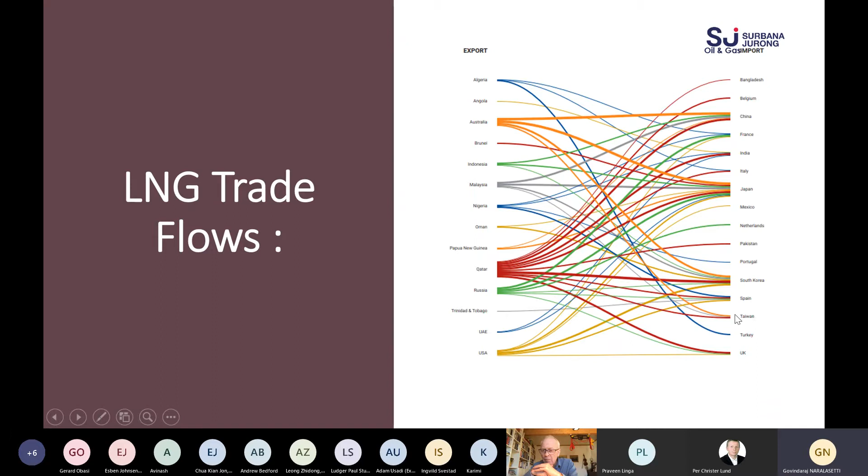So this graph tells you where the major suppliers are. You can see that Qatar is number one - and this is not updated, this is from 2019. Australia also increased its volume, almost very near to Qatar. Then there is Russia, which is also supplying a significant amount of volume, and then USA. On the user or receiving side, Japan imports quite a significant amount of LNG, followed by South Korea, then China, then Taiwan, Spain, and also India.

So let us see what LNG is. I think most of us know it is liquefied natural gas, and let us understand what cold energy is. When methane is cooled to minus 162 degrees C, the volume of methane shrinks by 600%, and we call this liquefied natural gas.

This LNG has got two forms of energy. One, we call thermal energy, which is basically cold energy, and the second one is expansion energy - the energy generated while it expands 600 times.

So let us see why cold energy is important. As energy consumption is increasing, CO2 emissions are increasing in the world. At the liquefaction side, these plants put a lot of energy to liquefy natural gas to LNG, and such huge LNG cold energy is transported via ships to various parts of the world.

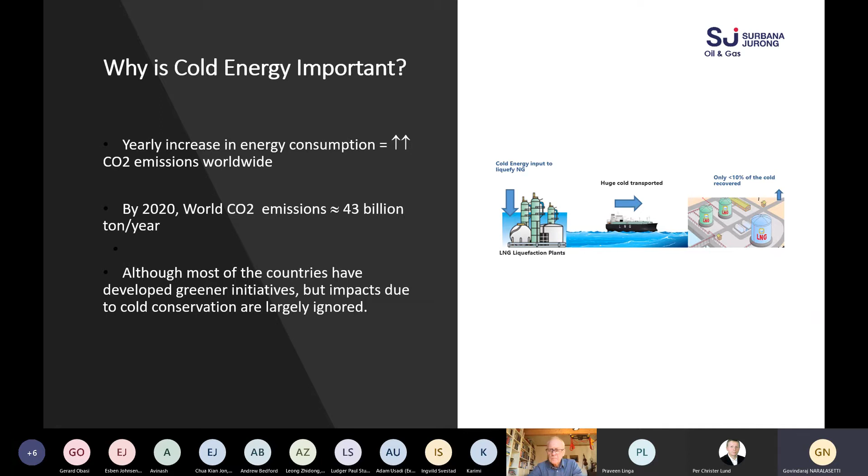So today, by 2020, world CO2 emissions are somewhere around 43 billion tons per year, which is quite significant. Although most of these countries have developed greener initiatives, the impacts due to cold conservation are largely ignored. The reason is people feel that cold energy harnessing is always an expensive affair. But if we are able to plan it properly, we can probably achieve the right economics to make it work for various applications.

In terms of Singapore, if you see the Singapore energy mix currently for power generation, 95% of the fuel comes from natural gas. So it's quite reliant on natural gas, and Singapore gets natural gas via piped supply from other countries as well as import from LNG.

Singapore has also got a carbon tax regime - it started in February 2018, and currently they charge around $5 per ton, which is going to increase to $10 to $15 per ton by 2030.

So some of the major contributors for this CO2 generation are power plants, which are the major one. Then we have semiconductors, petrochemicals, and refineries. I did not mention one more thing - even the ships, because Singapore is also a shipping hub.

So as SJ, we are looking at developing a low carbon district where we can reduce that carbon footprint using clean fuels, and also achieving this lowering of the carbon footprint through the energy optimization process.

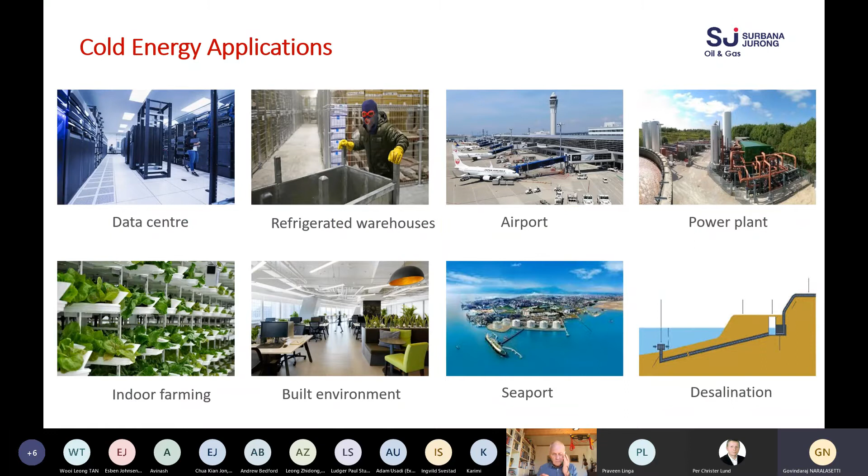What are the key challenges? We foresee that there is a collaboration required from various industry partners to reduce this carbon footprint. So we should all believe that this is one of our motive to come together.

And then second one is, I think there is a need for the coordinated efforts between the government agencies and regulators, to promote the development of such ecosystem. And it is always better to plan ahead so that such ecosystem can be developed well in advance.

And there may be changes required for the safety and security measures because, especially in Singapore, we are limited with LNG trucks on roads. So additional safety and security measures should come in place to mitigate any such incidents.

Last one is, consultations with regulatory bodies on road safety and also cold export via trucks will help. One of the ways we can do is we can also suggest a dedicated way for such trucks to move on. Is also one of the things which we can think through.

In conclusion, these cold energy harnessing techniques will help reduce the carbon footprint. It also increases the synergy between the processes and companies, and the potential to attract like-minded businesses for greener solutions. It improves various process efficiencies, especially for refineries, petrochemicals, and power plants. It also helps reduce operating costs.

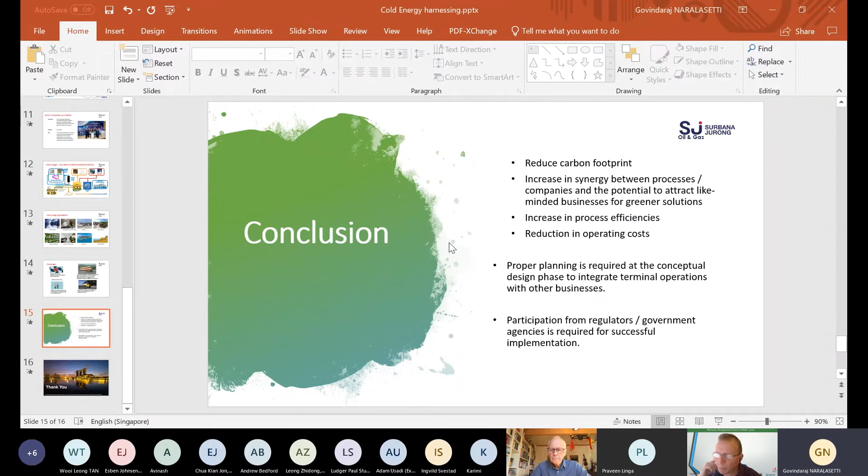Thanks a lot. Professor Gundersen, you're next. And I remember that Professor Linga said he had this crazy idea about using cold from LNG for CCS, for carbon capture and storage. I believe that is the title of your presentation, isn't it?

Yeah, I'm not having screen control. You can have the screen control, can't you? Just take it, open the share tray, share content. If not, I can see if I can find your presentation here and show it for you. Do you have it? Do you want me to show the open share tray, but nothing happens? Somebody else sharing the screen? I had the same problem, Per, actually, that's why I was not able to share. Okay, let me see, I can show it then for you. Just hold on a second. I will put it here, and then sharing. Sorry for that everybody, this has worked a number of times, so I don't understand why. It's the magic of technology, I guess.

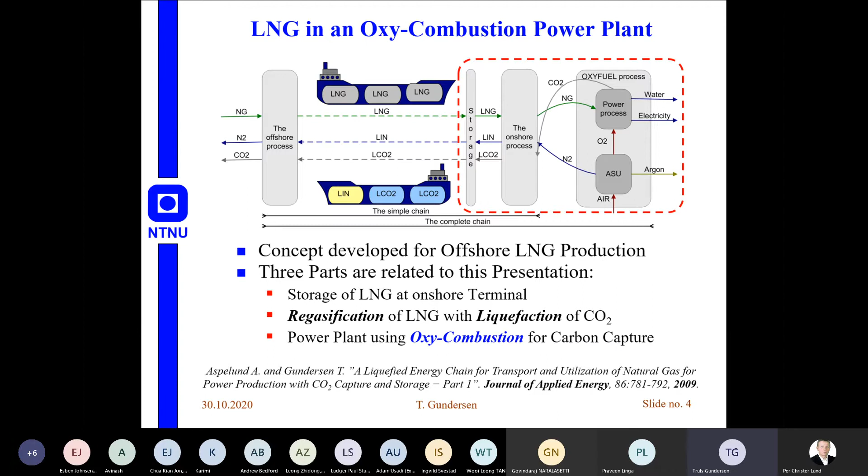We actually started looking at these kinds of problems more than 10 years ago, in a concept where we produced LNG from stranded gas offshore and used it in a power plant based on oxycombustion, with carbon capture through liquefaction. Next slide please.

If you look at the last 10-15 years, there's been extensive research on oxycombustion-based power production. The IEA GHG has a report from 2015 studying four of these cases, and I will give a brief comparison here. Next slide please.

So there are four cycles. The first is the semi-closed oxycombustion combined cycle. Next slide please, I will not go into the details here. Clean Energy Systems has a Rankine cycle-based concept.

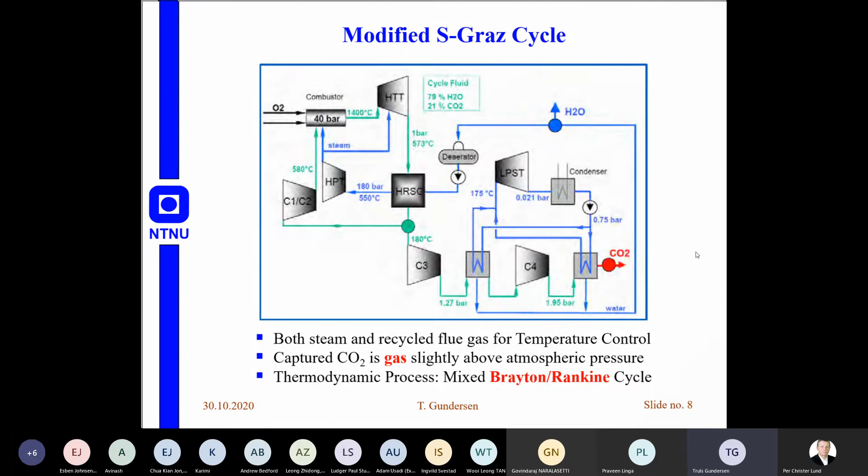Next slide please. Then we have the modified S-Graz cycle, which is a combination of a Brayton and Rankine cycle. And then as the fourth, next slide please, we have the Allam cycle that was introduced by Alessandro in his presentation, which is a Brayton cycle. Next slide please.

The Allam cycle is not very old. It was presented for the first time in Kyoto in 2012. There is a test facility in Texas that started up in May 2018, and they collaborate with Toshiba and Heatric on turbine development and heat exchanger development, given the material challenges we have due to the operating conditions.

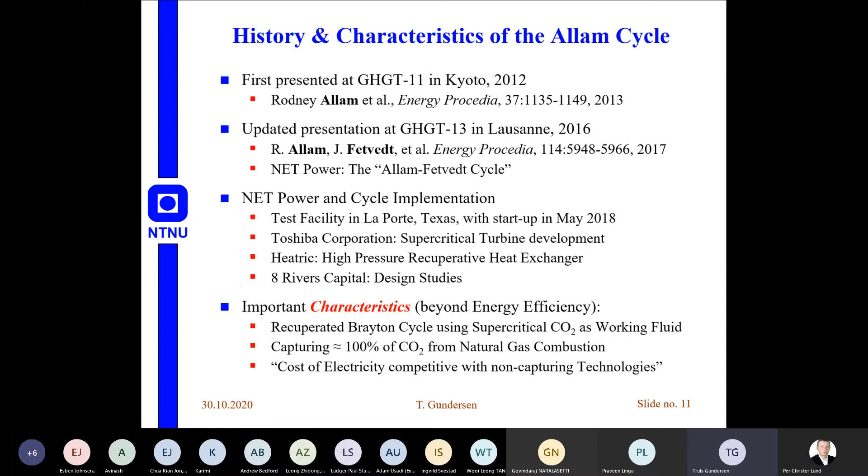Now an important thing to say is that the Allam cycle is a recuperated Brayton cycle, and it uses supercritical CO2 as the working fluid. Next slide please.

Since the Allam cycle operates at very high pressure and high temperature, and uses combustion with oxygen only, there is a temperature control problem, as with all these kinds of cycles. So we need a big recycle of flue gas, which is primarily CO2. That's zone 3, pressurizing the recycled flue gas.

So these three zones are subject to study, whether we can utilize LNG cold energy.

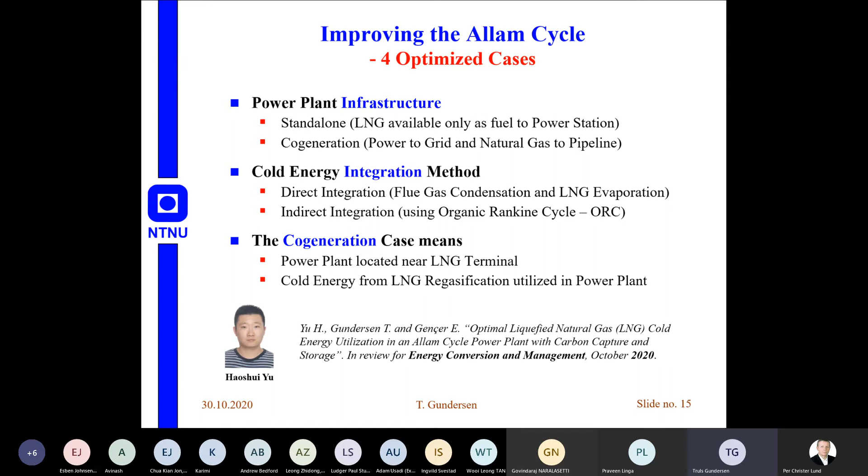That means we do not need a natural gas compressor, but the downside is that regasifying at higher pressure gives us less cold energy, so we are not able to fully liquefy the captured flue gas, which then needs, in addition to pumping, some fraction of compression as well. The ORC case has the same optimal pressure.

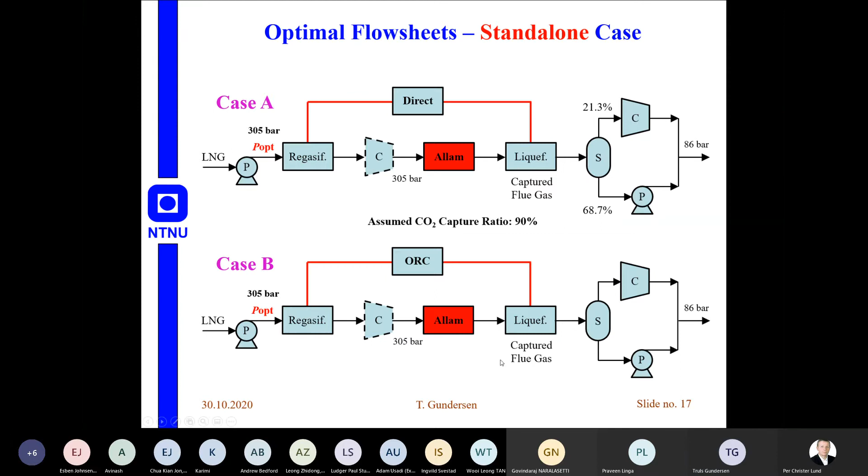Moving to the cogeneration case, we assume we have a very large stream of LNG. The large fraction of it is pumped to 30 bar, regasified, and sent to the pipeline. Then the smaller LNG stream, used as fuel in the Allam cycle power plant, is regasified by liquefaction of the captured CO2. In this case, we also have two alternative integrations, direct or using an ORC.

So these are the results. We are focusing on exergy efficiency and work consumption for these 4 cases. If we first look at the standalone case, we do not have enough cold energy available to consider all the zones, so only zones 1 and 2 are considered. The savings are moderate, and the additional saving from using an organic Rankine cycle is quite low, so it doesn't really justify the investment in an ORC. Our conclusion is that for the standalone case, direct integration is the best alternative.

If you go to the cogeneration case, we see huge savings in work consumption. And we also see that using an ORC really makes sense here. We go from 87 megawatt saved to 136 megawatt.

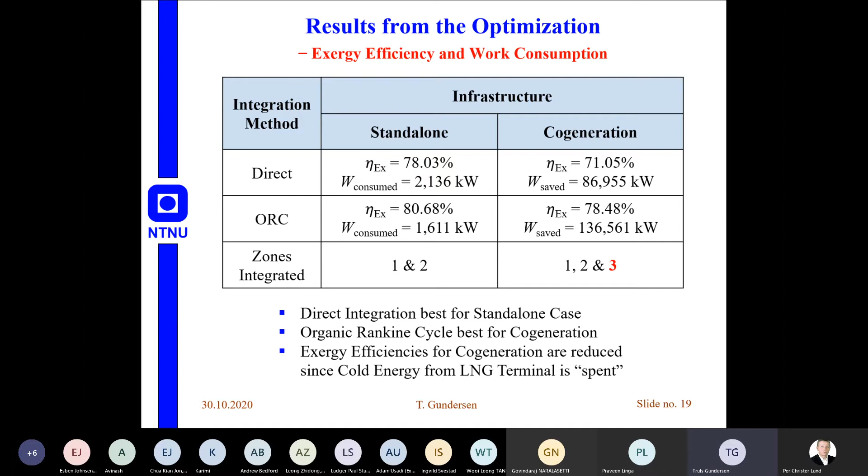So the second big consumer of work is the air separation unit. Next slide, please.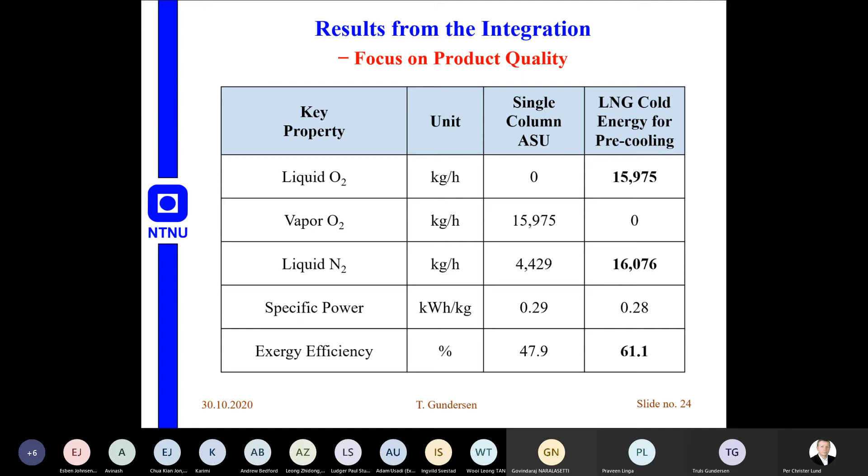Next slide, please. So I'm going to end up by hinting at 2 cases where we are using an organic Rankine cycle and where LNG regasification is acting as the heat sink.

We have also used organic Rankine cycles to produce power from gasifying LNG. In this case, we're using 3 organic Rankine cycles. And there is one additional item here that we didn't have: we actually have CO2 coming in from the right here and being liquefied by exchanging heat with these organic Rankine cycles. So next slide, please.

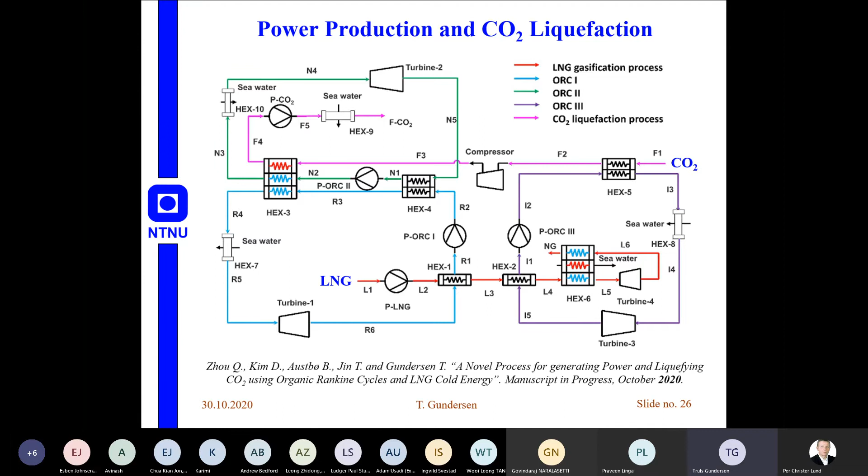So to conclude, I think that this presentation, as well as previous presentations, has clearly indicated that cold energy, or exergy I like to call it, from LNG regasification is an important asset in energy efficiency, and it has numerous applications. It has also been already described by the previous speakers. So with that, I would like to end my presentation and hand it over to Per. Thank you.

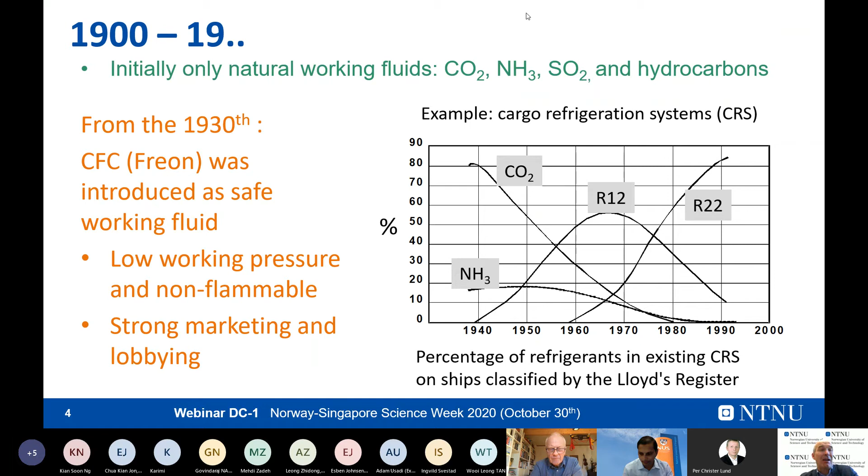We all know the story about what went wrong. They were heavily introduced, had low working pressures compared to the others, and had very strong marketing - there was big business behind them. But the challenge was there was a huge consumption of this stuff, and it was released into the atmosphere, and it stays a very long time there, and that's still the trouble we are facing today.

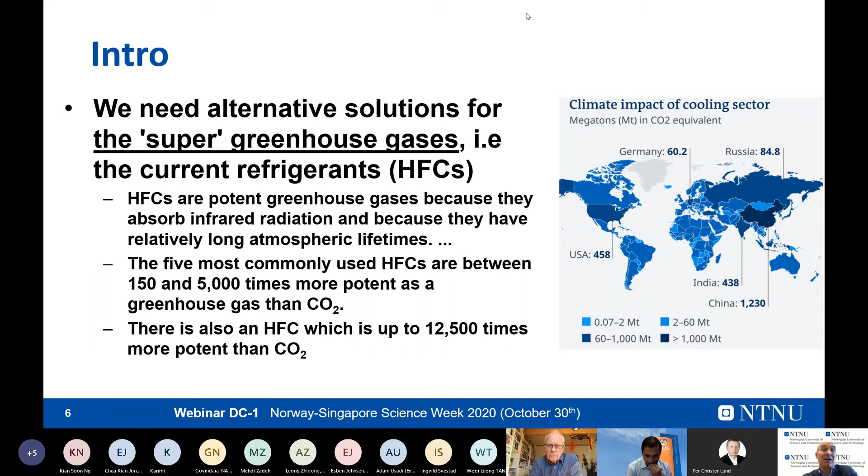Why is it important? Because we need alternative solutions for the super greenhouse gases, the current HFCs. The climate impact of the cooling sector is quite significant - there's a huge amount of refrigerant which goes out. Approximately 2% of global total emissions is only related to refrigerants. In addition, of course, there's the energy consumption to operate all these systems. So we need to find solutions to eliminate that 2% and also make systems more energy efficient.

Of course, we need other solutions. But what was the good thing with the Montreal Protocol? It entered into force only after two years. This is the most successful international protocol ever, and the fastest introduction ever, because everybody understood this is an action we have to take. By that time, it was only the ozone layer which was the focus - there was no focus on global warming.

However, it triggered the revival of natural working fluids. Our previous professor, Gustav Lorentzen, triggered the application of natural working fluids, especially CO2, in mobile air conditioning and heat pumps. Why mobile air conditioning? Because by that time, the car fleet had specifically the highest emissions of CFCs, these ozone killers, because the systems were made very cheap, and recharging every year was quite normal - they used refrigerant that didn't stay inside. So Gustav implemented this into research here at our institute, and nowadays, after 20-25 years, you can buy the first cars using CO2 as the refrigerant.

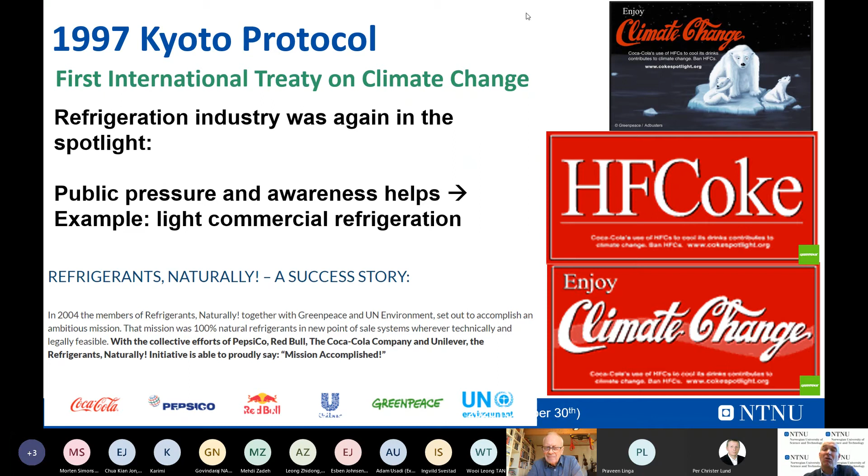Then the Kyoto Protocol came in 1997. However, that took 7 years to get into force. Why? Because the big players didn't contribute - the USA refused to join, and China and India were not included either. However, Greenpeace took it up, and there was advertisement, a little bit fixed by Greenpeace, that triggered something in the market. So Coca-Cola and all the brands shown since that time replaced all their HFC equipment, and now they do all the cooling in bottle coolers around the world with natural working fluid. So it had something good, but it took a long time.

And now focus is more and more on greenhouse gas emissions and global warming. That's why we have the Paris Agreement and the Kigali Amendment, to phase down the use of these high super greenhouse gases.

But the Kigali Amendment now is a kind of tricky thing, because in the meantime the chemical industry has taken out another kind of fluid which they believe is their fourth generation, but the problem with this stuff, it's unsaturated HFCs, so they just gave it a new name, but it's exactly the same shit, to be honest. But it's not stable, so it stays much shorter in the atmosphere, which is of course good for the engineer who solved that problem on global warming. But the decomposition products are very, very nasty and dangerous, and so it fixed the problem on greenhouse gas emissions. The values are very low, but all these byproducts are a big problem.

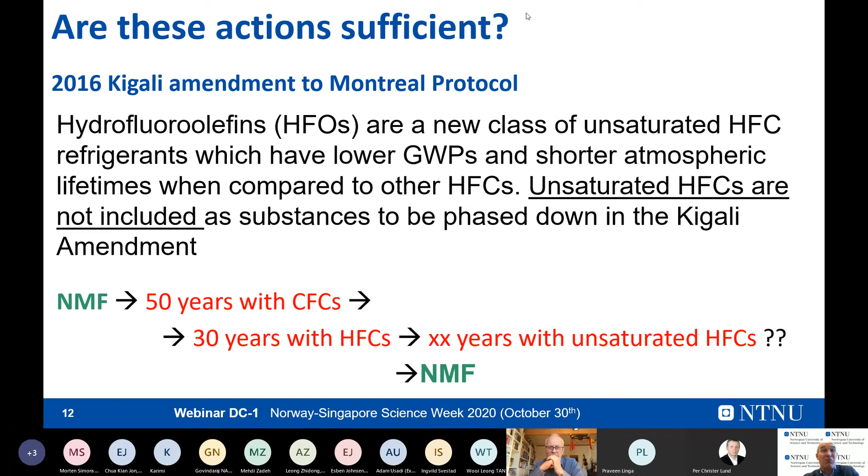But that's not the focus of these protocols. That's why they go under the radar. But we believe we should implement natural working fluids, because that's a really long-term solution.

On the other side, this new stuff is also flammable. That is, in this respect, dangerous, because if you have a natural working fluid like propane or hydrocarbon, at least you know what your decomposition products are. But in this case, this stuff contains fluorine, and it's really dangerous what happens if it starts to burn. It's really poisonous, and very few ppm can make the difference if you survive or not. So that's why we have to take care of this and be aware.

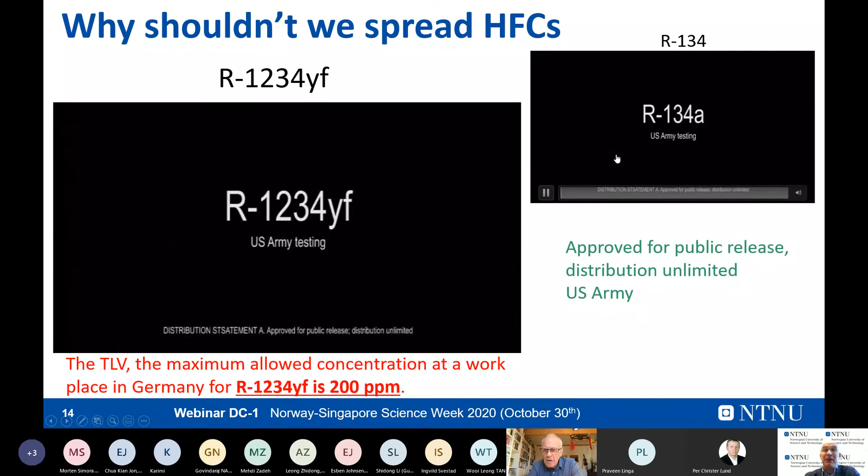I'll give you an example. The US Army has tested this stuff. This stuff on the upper right-hand side is what you have in your car normally, if it's a little bit older car. What we see here is the side view of a radiator or a condenser. They shoot a bullet through it just to see what happens. Now there's a hole in that heat exchanger. It is released, nothing happened, it's not burning.

And this stuff I show you now, that's the one you have in modern new cars all around the world, which doesn't have the global warming potential anymore, but you see what happened if you have an accident with some impact - this stuff burns, and it's very dangerous to be close to this fire. When you have an accident and the car starts burning, please leave immediately. So it's very different, but this is very underreported. Nobody talks too much about this.

The second, real problem is we cannot do life cycle climate performance assessments of these systems because we don't know the emissions related to the production of these more complicated fluids. This is all kept secret by the companies. So making a good comparison is really not possible nowadays. Especially these degradation products are a big problem for the biosphere and the food chain, and humans and others. And we have alternatives which are actually more energy efficient.

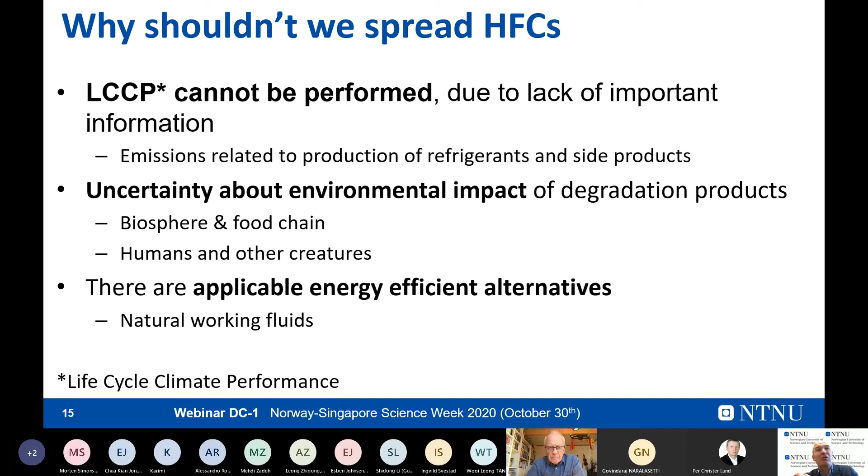So why should we go into this unsecure future? We believe that we should focus on natural working fluids, and there's really no risk if you go in this direction. What are these working fluids? It's carbon dioxide, as we will focus on today.

These are products, for example, for hot water heat pumps. In Japan, you have more than 5 million of these heat pumps all over Japan in the houses. A lot of commercial refrigeration - we'll go into a supermarket - but also industry has a lot of CO2 refrigeration systems nowadays. Ammonia has been, since the old days, an industrial refrigerant. It is still used in many places all across the world. Hydrocarbons are coming in to replace most of these low pressure fluids now in residential units. You see them in China, India, all over. They're coming in. Light commercial, we've seen there's no question anymore. The bottle cooling stuff is going in this direction, and also all home appliances like fridges and freezers are using butane nowadays.

So this is a picture of what is currently installed in CO2 supermarket systems. That means CO2 is the working fluid in all the installations in the supermarket, and you see we are approaching more than 30,000 units in Europe, and even Asia it's taking off. America is coming too, so it's going in this direction. Whenever they find local manufacturers or local vendors able to implement these systems, they utilize it, the big chains nowadays, because they see that this is a long-term investment, and they can even save electricity.

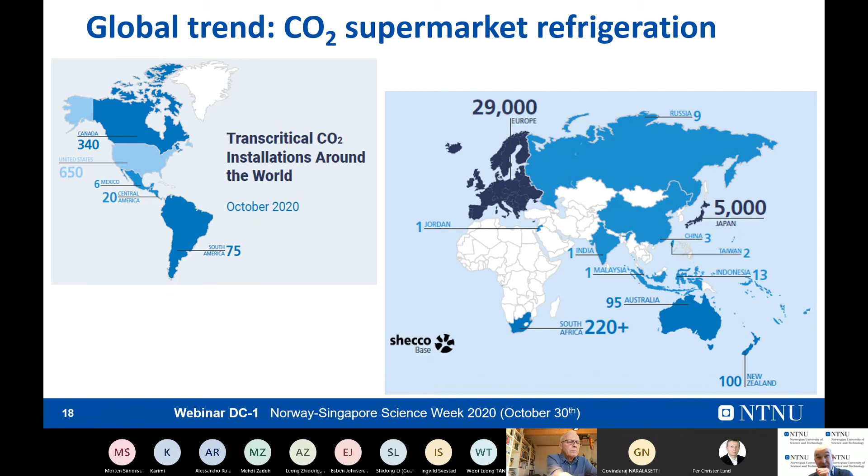So some examples. I don't want to go too much into technical details, but the feature of this supermarket system is, beside the cooling of the food and the food stuff, you can also implement air conditioning and heating of the shop, which is important in some places. In Norway, it's more the heating. In your place, it would be more the cooling.

But even in Norway, you need some cooling. The good thing is we can implement these functions into the system, and it's all in one, which reduces the total cost of ownership for the supermarket owner, because they have only one guy to talk to, and the service gets easier.

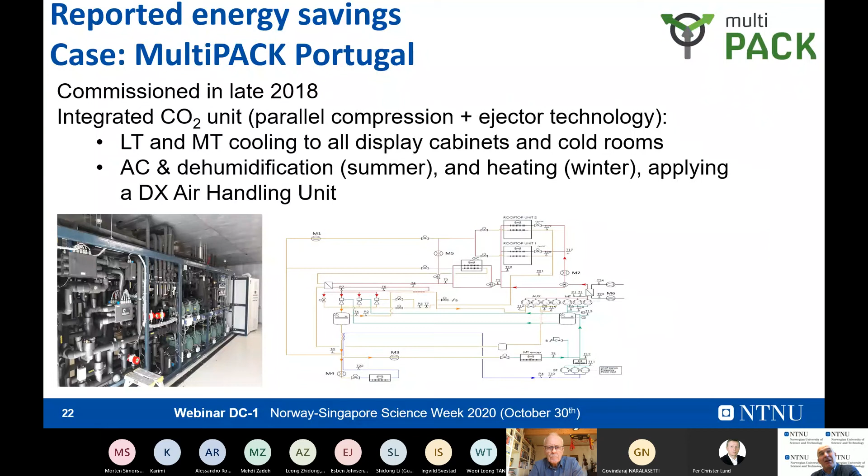This is only an example for one shop, so it is possible to do this even in a hot area. This is another place, in Portugal. Similar findings there. This system is running very well. It has all these functions we talked about, air conditioning and everything, and it saves about 30,000 euros a year just by reducing the electricity consumption from the shop.

Another feature we can do with these CO2 systems: in Japan, it's a typical heat pump in all houses, but if you enlarge it a little bit, you can implement a chiller function. So you can combine your heating and cooling demand, for example, in high performance buildings like hotels. It's very easy to make chilled water, take it down from 12 to 5 degrees, and at the same time produce 90-degree hot water for the showers and so on.

So this is an application to come in Europe. More and more companies are able to build it, and they can outperform all the other systems when you do these integrated functions. We do this also together in a program with India.

Even in India, they will now be able to build these kinds of systems. We do it together and implement this in a school kitchen to help the Indian refrigeration people understand how to do this, to make training, because training is very important to understand this new technology. So we have these kinds of examples around the world, helping the refrigeration and heat pump society understand how to go on further.

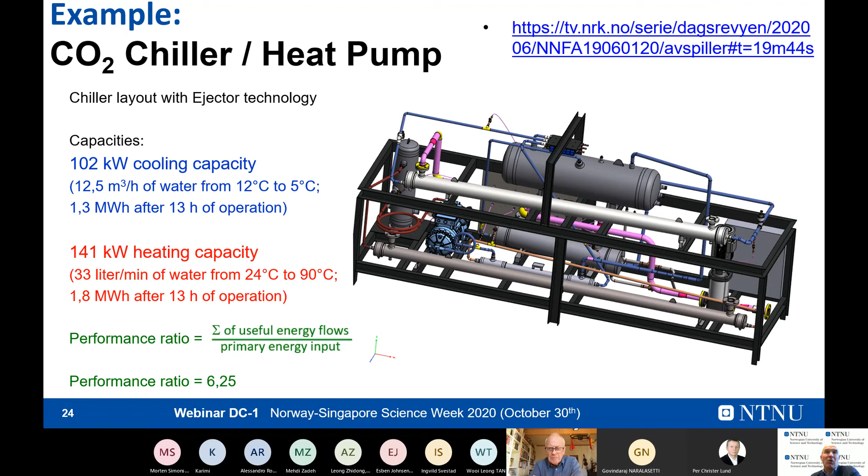So in a very short take-home message: the safety of people is very important. If you have these new HFCs, I'm not sure if safety is really taken seriously. And if we just look at the global warming potential values of working fluids, that's not the whole picture. We have to look at the byproducts and all the other safety issues as well, and take responsible choices there, and we have to inform the end users.

The end user is the key. If he knows what he's really into, then he would choose something else, I'm pretty sure. Ammonia is still a very good option in many places. It can be handled safely globally, it's not a problem. Propane plays more and more of a role, replacing HFCs, as I said.

And the examples I wanted to show you today were where CO2 in some of the applications makes really sense. And what's important, what we try to do, is training and knowledge transfer to enable people to go into this direction and find alternatives.

The problem in many places outside Europe is that the return on investment is hard, but we should have a World Bank, a multilateral fund, programs not supporting the chemical industry to spread these new fluids all over the world. They should give loans to end users to implement these kinds of natural working fluid systems, and they can pay back the loan through the savings in operating costs, the electricity they save. That would help a lot to boost these kinds of systems all over the world.